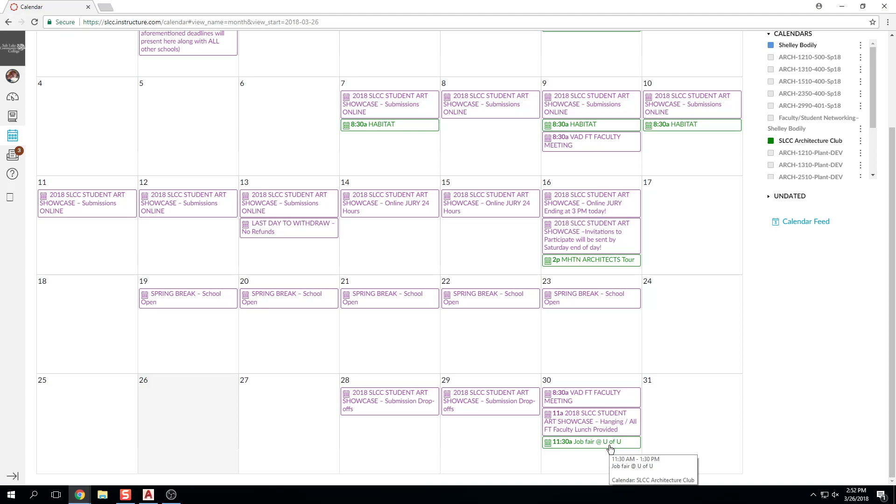You'll all know AutoCAD by the time you're done here. This is March. I talked to someone who works for Autodesk, does programming on the back end. That's cool. You could give him some suggestions on things to fix. I have several, though I don't know if he does AutoCAD specifically. He works for Autodesk, that's great, probably a really good job actually.

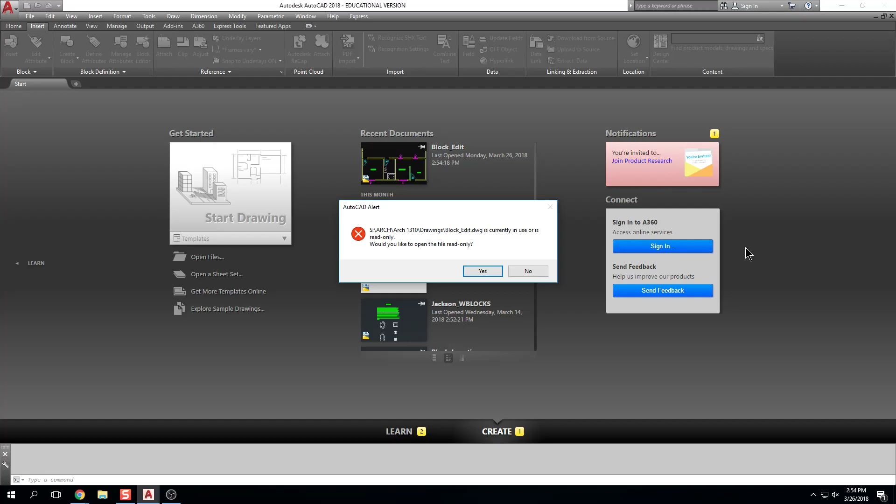Okay, so I guess dimensions are a little bit of a finicky thing too. I'm going to hurry and create a dimension type, I'm going to create a text style, and then we'll take this floor plan, create a paper space layout, scale it on the paper space layout, and in the meantime make sure our dimensions are showing by changing the annotation scale in model space. So all of those things will clarify.

And then finally, before we print, I'm going to show you how to load your pens again so that your line weights read right. Just to reiterate, line weights are color dependent in AutoCAD. So when I generate these layers and put specific items on those layers, they associate with that layer and turn the color of the layer. So A-wall is yellow, and yellow means something in AutoCAD when you use your pen file—it means a thick pen weight. So inherently, when you organize your items onto layers and print them with your pen file, you are assigning a line weight to your objects in AutoCAD.

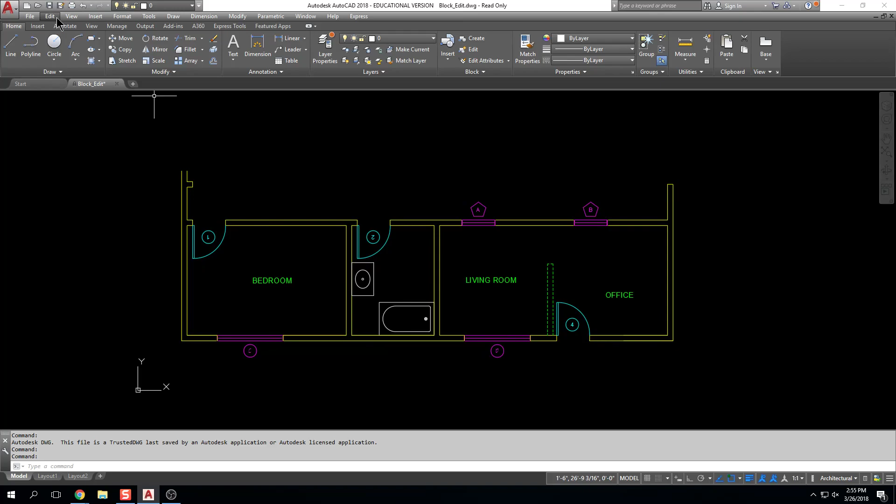All right, so first thing, I'm going to create a dimension style. I'm going to go to Annotate, come here to this flyout menu, and move through it pretty quickly, but I'll point out a few things. Any errors that I saw consistently, I'll point out.

Oh, that's not the one I wanted. This is the one I wanted. So I'm going to click on New. Oh, and it looks like I have one in there already, but I'm going to click New, and we'll call this Arch Annotative. Continue. Oh, see, I'm not quite on target. New.

Now, the most important thing here right now is I need to click on Annotative. So I'm going to click on New, give my dimension style a new name, and then click on Annotative. Annotative allows my dimensions to flux in size—regardless of what scale I print my drawings at, I only have to have one dimension style, and that dimension style will get larger or smaller depending on how I scale my drawing. So I'm going to hit Continue.

These settings actually look pretty good. So if I go to Lines, I'm going to change that to by layer, and change this to by layer as well, so that they associate with the layer. So those are some of the things I'll look for here.

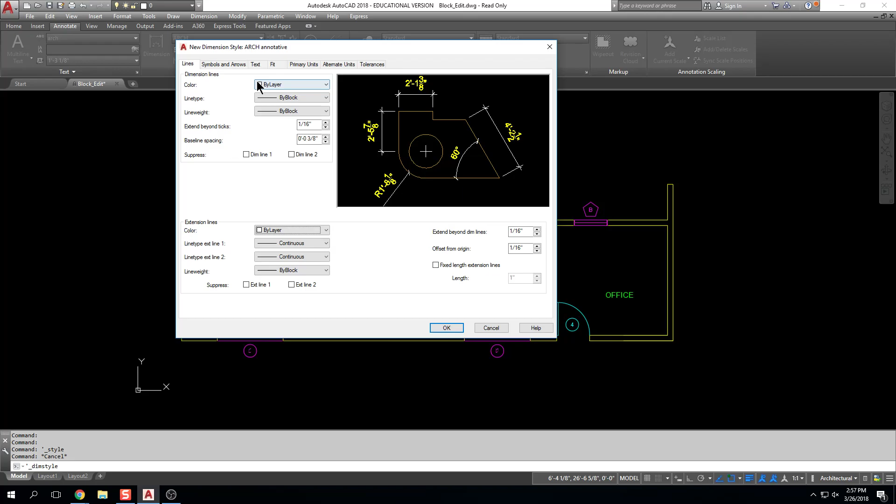I'll go to—yeah, are you good? I'm good. Well, except for, you know, the one thing, the code. But that's where I'm headed.

Okay, look, everyone's here, and you're attentive even after spring break. This is awesome. We were just talking about how rough it was today. Hey, did you tell him you dropped five things on the way in? Well, you missed—on my way back up the stairs I spilled half my cup of coffee on the stairway. Is that why it was halfway? Yeah, give her a break. Be nice, give her a cup of coffee. You know, I'm not quite awake today—half the day. Hey, that's where I'm headed. Okay, I appreciate it, thanks Kevin. I know half of it got on my pants, to be fair, not just the floor, but...

All right, so symbols and arrows—you know, I have an architectural tick designated here. This is really just kind of how we're defining these, but if you wanted them to look slightly different, we could change it to oblique. So instead of architectural tick, which is thicker, it could be oblique or whatever you want it to look like. All this other stuff looks good.

I'm going to go to Text. I'm going to choose a text style that I've already generated in my drawing. If I don't have a text style generated that's annotative, I'll create one. So here, I'm going to click on this little ellipsis, and I have Arch selected, but that's not annotative, and I want an annotative text style.

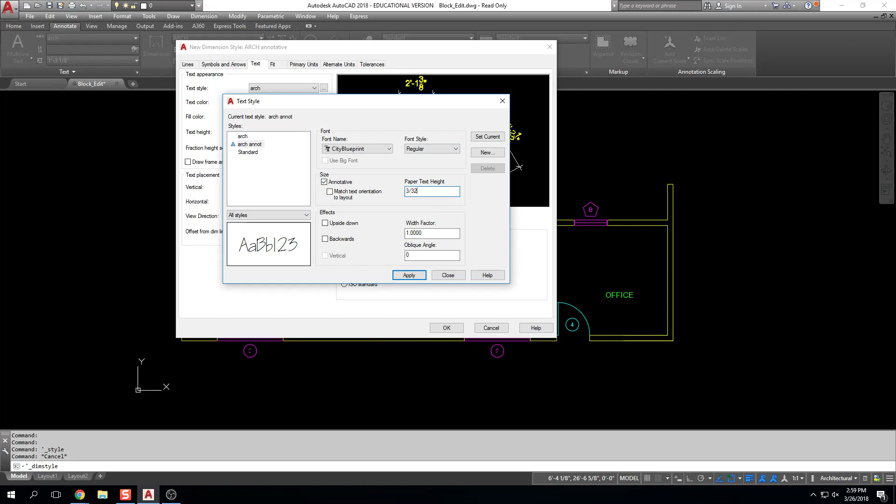3/32nds, okay, this is a departure from the book. Our book is somewhat getting outdated, it's on our list of things to do to update the course manual for this class, so this is a little bit different in the manual.

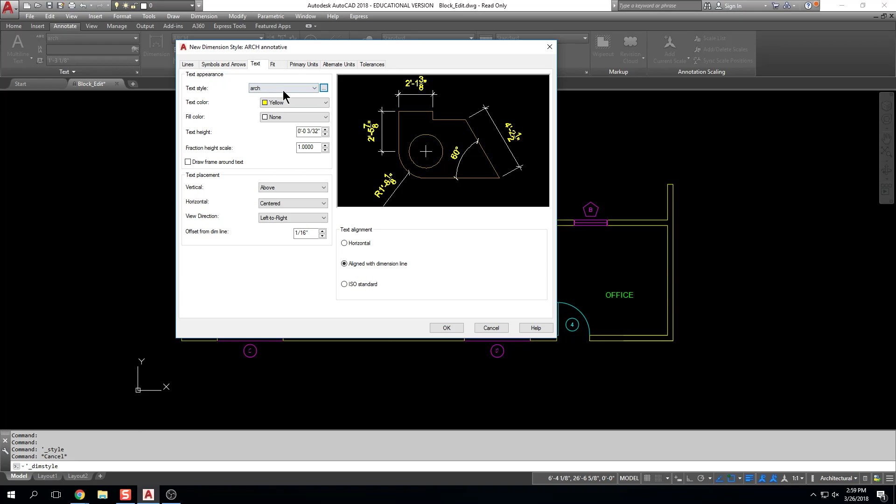We're going to check annotative, make the text height 3/32nds, and I'll hit apply, set current, and close out. Now I just need to make sure that my Arch Annotative text style is chosen.

Something really weird happens, right? The text goes all funny and looks tiny. I'm not going to worry about that just yet, okay?

So yours didn't do that? Yeah, mine didn't. Okay, it's probably still okay, it's just how my screen's maybe regenerating. But no, yeah, that's right. We'll see if it works, and if it doesn't, we'll go back and investigate.

By layer, vertically - I want my text to be above this dimension line, and I want it centered. The text alignment is going to be aligned with dimension line, as opposed to horizontal, where you see it breaks the line right there. I want it aligned with the dimension line.

I go to fit. These look good. I want this annotative, right? If I uncheck that, this number pops up - I don't want to work with that, so I'm going to keep this annotative.

I go to primary units. We want this architectural, precision 1/8. That looks good, this looks good. I'm not really worried about much else in here, it looks pretty good. So those are all of the settings I'm going to change.

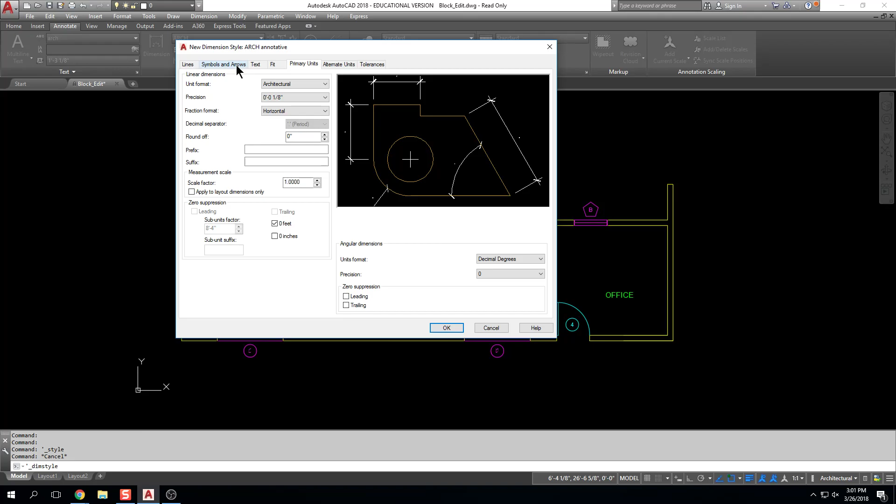With annotative dimension styles, which is similar to annotative text styles, the main thing I'm going to worry about is making sure that when I generate my dimension style I check that annotative checkbox, and that when I create my text, same thing - I make sure this annotative checkbox is checked.

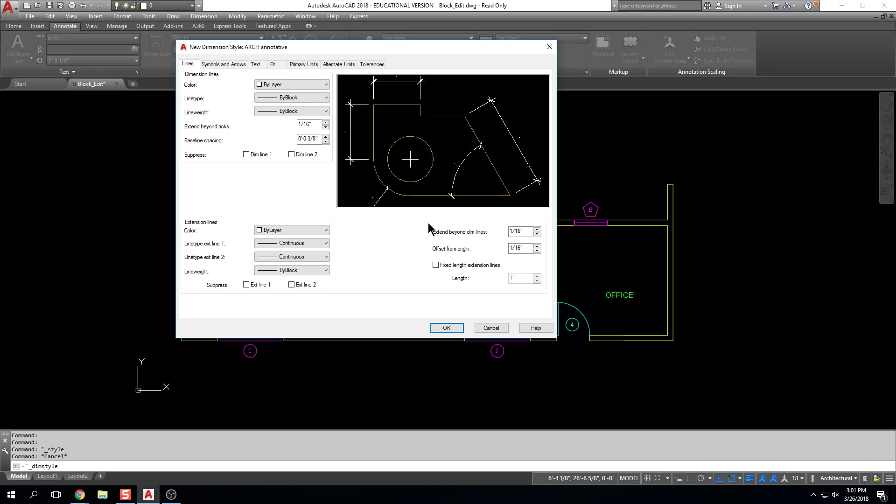Could you go to lines so I could just double check? Could I do what, sorry? Go to lines so I can just double check that. Oh, did I get everything right? Yep, oh okay, yep, there you go. So I hit OK, I hit close.

And I've just created an annotative architectural dimension style, right? So the first thing I'm going to pay attention to when I use my dimensions or text is make sure that the style I just created is current, because if this is set to Arch and then I go in and create my dimensions...

That looks pretty good, right? But then when I scale it, it may not look that great. That actually was kind of a good error because it actually worked out, but it wasn't supposed to. Make sure that when you create your dimensions, the style you just created is actually the current style - it should show up here, ready for use.

And the same thing with our text.

Did you fix your error? Well, it works on the new stuff. Okay, is it tiny still? Super. Okay so you think, time to dimension, linear dimension, click, click - oh, super tiny, not working, right?

The reason it's super tiny is because our model space is set 1:1, okay. Now we're going to just set that aside for a second, and I'm going to delete this dimension. I need to figure out what size I want to print this at.

What scale I want to print it at - then I'm going to set my model space to be the same as that scale, and then the dimension should be the right size. So I'm going to just put my dimensions on hold for now.

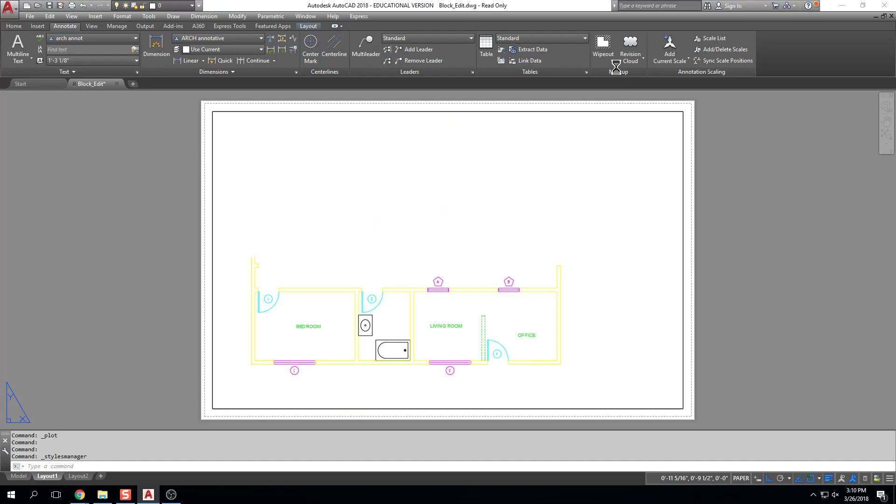So now Control P - that should be available there, okay? Yep. Where's Plot Style Manager? So Plot Style Manager is under File. Okay, so is it because these are missing?

Okay, so here's another thing, right? If these menus are not showing up, you have to go to this little drop down right here and choose Show Menu Bar. Okay, so then those will pop up and you can go to File, File, Plot Style Manager, and paste it in there.

So if you are here and it's available, you're like great, it's available, and you use it and you print and everything looks good, right? Then you go home and it's not there and you're like, well, it was there earlier today and this is the same file I was using, right? But it's not a characteristic of the file, it's a characteristic of your AutoCAD, right? So you have to take that file and load it in and then choose it as an option, okay?

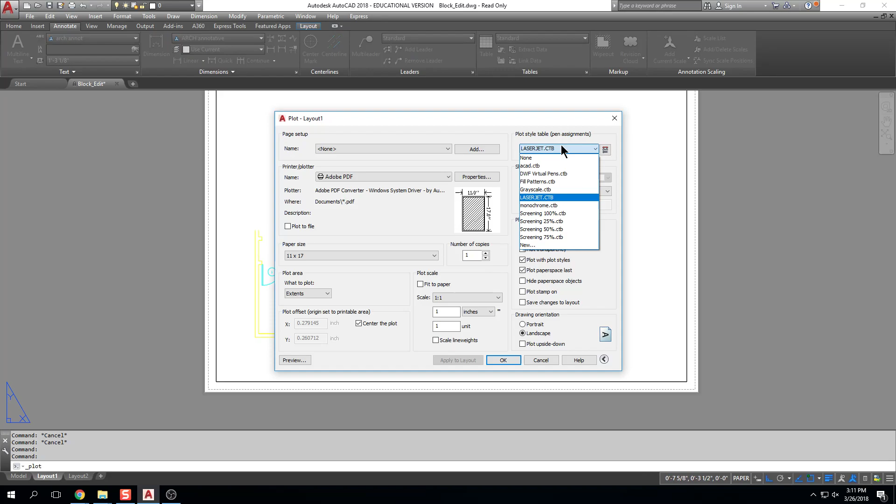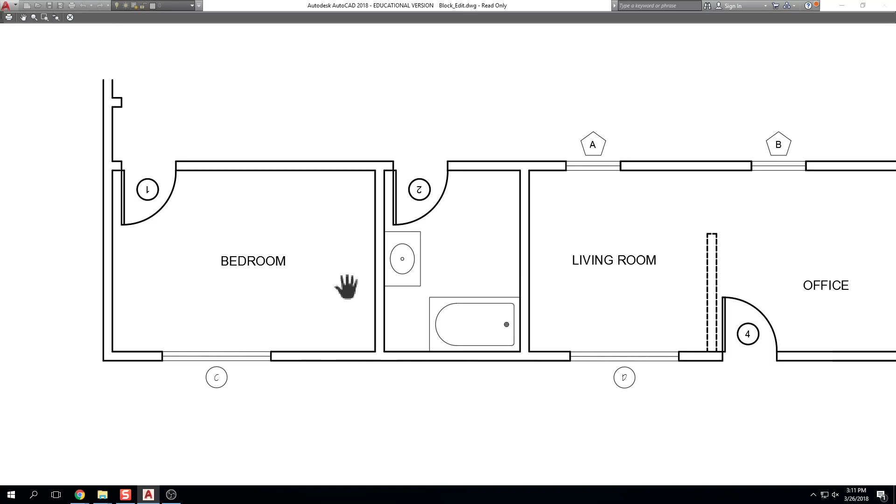So what does that do exactly? Control P - if I just have this ACAD CTB and I preview my drawing, it's gonna look like that. That's wrong, right? If I choose LaserJet CTB, preview, look how nice - I've got thick lines for my walls, thin lines for my windows, medium lines for my doors, right? That's right. If you think, well, I don't have either one of those, I'm gonna use like grayscale - and I preview that, that's wrong, right? I immediately can tell if you've used your pens or not, right?

Let's see - so all of these are going to give you incorrect line weights, except for LaserJet CTB, okay?

If you think, well, how am I going to get it home, how am I going to put it on my home computer, right? You just email it to yourself and load it in. So you can take this file from CAD Common, attach it to an email, go home, download it from your email, copy it, go up to File, Plot Style - we are having some troubles here today, aren't we? File, Plot Style Manager, and at home you'll paste it in here as well, okay?

Okay, all right, so I've loaded my plot style, my pen files, right? I've set up my page to be 11 by 17. I've set up my dimension style, my text style, but I haven't really used any of it. I've done a lot of setup right now, right?

Okay, so let's talk about - we're gonna scale this drawing, and by scaling it I know what scale to associate with my dimensions and text, and I can finish doing that stuff on my drawings, okay? So how do I scale my drawing, right? Well, I have this piece of paper, I have my viewport - you all hopefully know what a viewport is by now, okay?

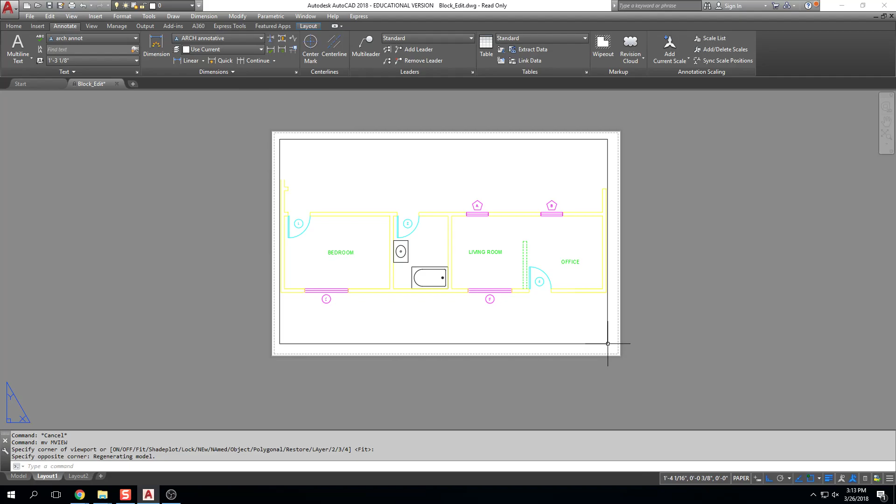If I select my viewport, okay, and I come down here, this says varies - oh, hold on. Hold on, mine has some things happening with it. That one. You are being recorded, Jameson.

Okay, so there's my viewport. There was something weird with my other viewport - it was locked, I think. But if I click on that viewport, do you notice that this number right here just shows like a decimal? That basically means AutoCAD took that drawing and made it whatever size it needed to be to fit on this page, right? So it's not to scale - I can't measure it and get a quantifiable dimension off of it, okay?

So to scale these drawings is really easy. I click on the viewport, drop down here, and choose what scale I want. Well, you may not know what scale you immediately need, right?

You're like, these are just scales. I don't have a sense for what they mean yet. So just try a few out.

1/4 of an inch. Well, that looks pretty good, right? But you could have accidentally chose 1/64. Nope, didn't work, right? But the nice thing about scaling this way is that you don't mess anything up by choosing different scales. So I can choose 1/64, grab it again, change it to 1/8. And, oh, nope, I can change it again, right, to 1/4. Okay, better, but maybe a 1/2 inch is even better than that, 1/2 inch.

Oh, too big, right? I think maybe the inclination is to look at this and say, well, if I scale it once and then I scale it again, it's going to scale a scaled object and then it's going to be all messed up, right? But that's not what happens with this system. I can continue to scale back and forth, right, to different scale sizes, and it will be correct every time. I'm not changing the geometry. I'm just changing how I'm viewing it, okay?

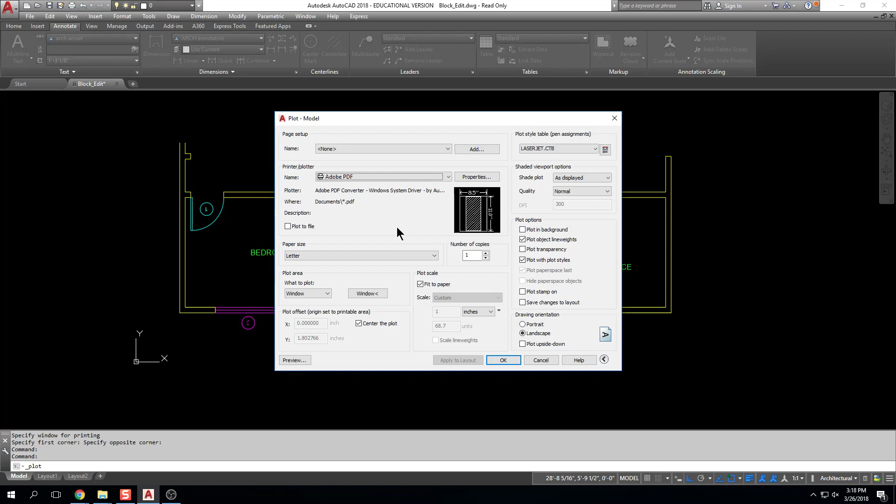Okay. This will be in the video, so if you have a question, you can watch it over again. Yep. Well, there's also an assignment, sorry. It says to print the drawing in paper space at 1:1 scale. Right. Yes. So 1:1 scale, model space.

Okay. Paper space here. I think where you're getting confused is the idea that when I click on this viewport, I'm scaling the viewport. Okay, so essentially I'm looking from paper space into model space and I'm zooming in and out to get an appropriate scale. Okay, so we're scaling through the viewport.

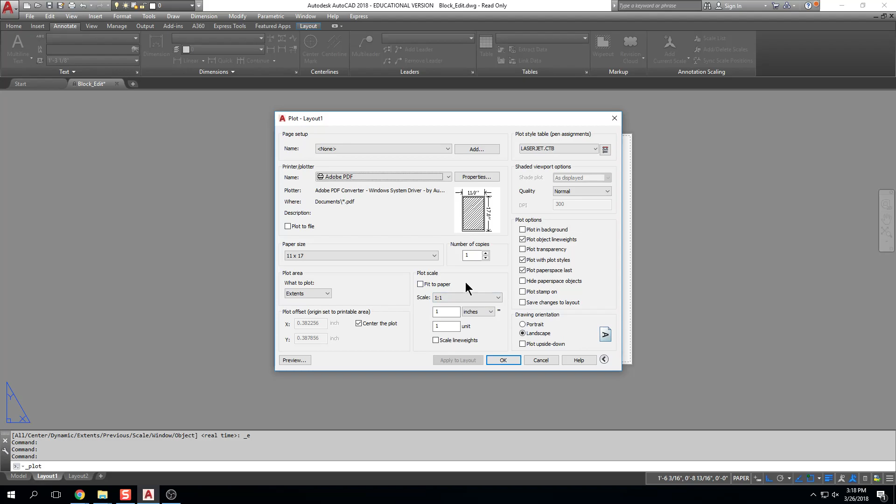But when I print in paper space, I'm still printing at a 1-to-1 scale, right? I'm not taking my piece of paper and changing that. This right here, if I take this and change it to like 8-to-1 and preview, do you see what happens?

So with that, you make the viewport that size and then, like, is that, then you don't have to worry about the scale and actual printing part?

So the idea is that Paperspace is like a physical piece of paper, right? And it's a physical piece of paper that can pop out of a printer. You're printing the piece of paper 1-to-1 because you can actually physically print it. The viewport scales the drawing so it fits on that piece of paper.

On this one, we have the viewport so that it's almost the same size as the page. But if you have a little tiny viewport, that's when you would probably scale that, do the actual printing scale. So in Paperspace, you're always printing 1-to-1, no matter what. That can change in model space, right? But in Paperspace, you always print 1-to-1.

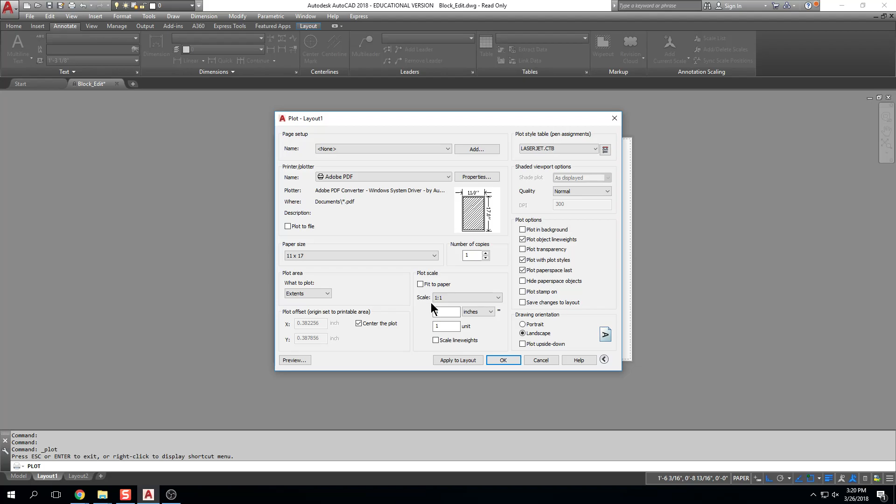I get it, it's confusing. I think I hear you. Eventually, you might wrap your head around it. But we'll just make a general rule: in Paperspace, this always stays 1-to-1. It's just a reminder that, hey, in Paperspace, we print 1-to-1. We scale the viewport, and then we print 1-to-1. And we can print 1-to-1 because the page is a physical size that will pop out of a printer.

When we're in model space and I say, hey, print that 1-to-1, it means that the stuff you're drawing, like those little puzzle boxes or whatever you want to call them, are small enough that when you print them, they could fit on a physical piece of paper that pops out of a printer. They're 4 inches by 4 inches, so you have like 4 of them on a page and you can print a letter size page. But if you have a building that's 100 feet by 100 feet in model space, then you can't print it 1-to-1. You have to print it scaled from model space.

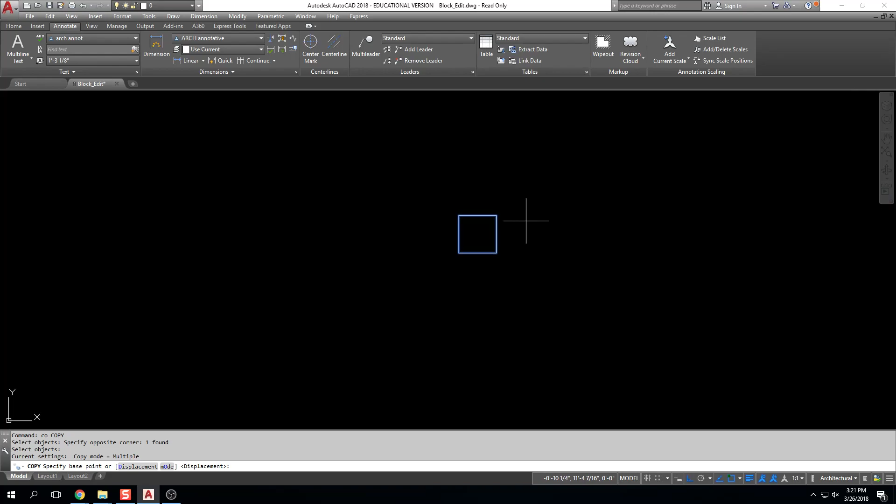Let me show you. Let me draw a little rectangle here. So if I draw a little rectangle and it's 4 inches by 4 inches, okay? And I'm going to copy this. Okay, you drew these little boxes, right? Well, let's just do 4 of them. It says you drew these little boxes, print these 1-to-1 out of model space.

So what that means is that if I draw a rectangle and it's, let's see, 8.5 by 11, that's a piece of letter size paper. And if I move it around, those objects, because they're so small, I really can print those 1-to-1 from model space. Control P, here's my window - is that actual piece of paper size, okay? I can choose 1-to-1.

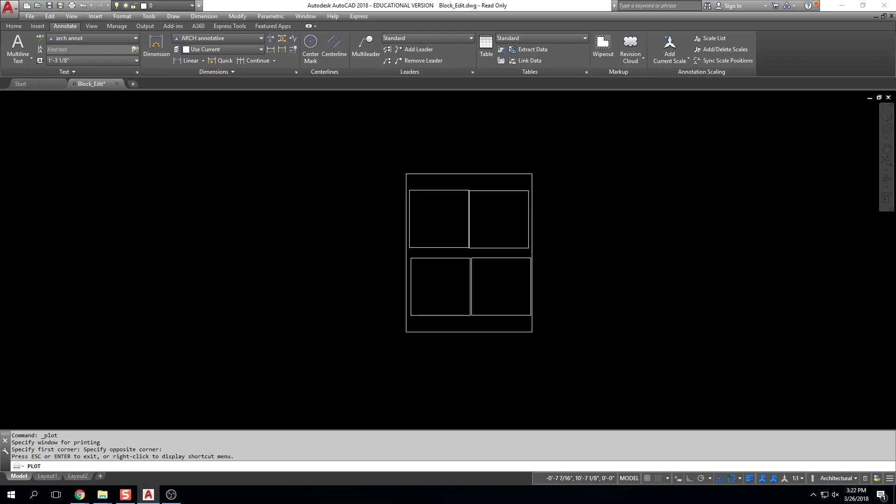We'll do portrait, and I'll preview that. Uh-oh, what did I draw? What layer did I draw those on? Okay, let's see, here we go. Uh-oh.

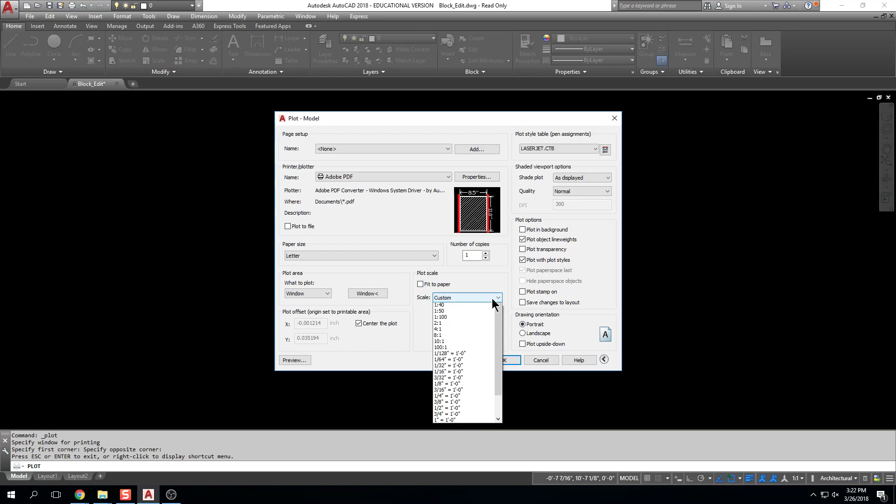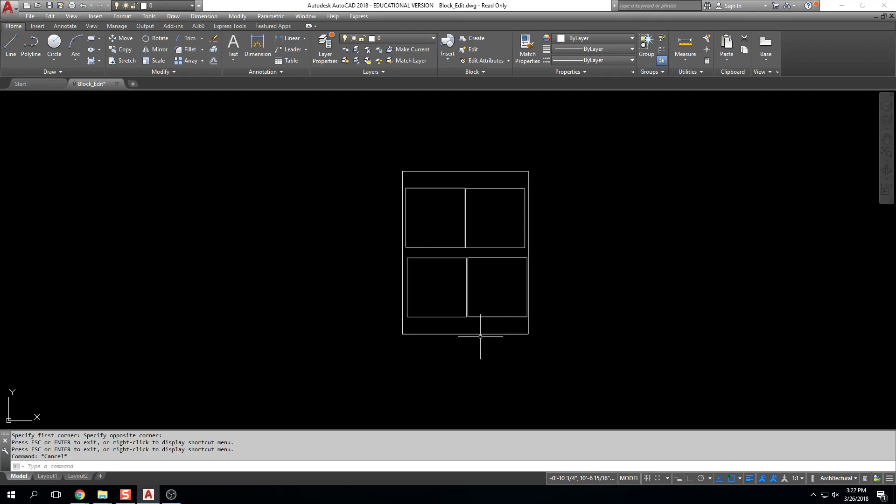I think we may have something going on. I think it's this file though. The idea - do you see what I'm saying? So this is 1-to-1. There's something with this file, things are not quite working the way they should. But with this, hold on one second. I've got this 8.5 by 11, that's a physical piece of paper size. But if I take this same page and I say, hey, I want you to print this floor plan on this piece of paper, it has to be scaled from model space. Does that somewhat make sense?

Landon? Yeah? Okay. But then from Paperspace, I have this physical piece of paper defined and a viewport, right? So this physical piece of paper is always printed from Paperspace 1-to-1, and then the objects are scaled through the viewport.

So would the best way to print in model space be to use the Window option from...? Well, I think in general, you'll probably just get used to the idea that you're not going to be printing a whole lot from model space, because it's just too difficult, and it doesn't allow you the freedom to do multiple viewports on one page. Sometimes I have you print from model space just for practice, to know the difference between the two. But in general, you very rarely professionally will ever print from model space - it'll always be through Paperspace. It's just easier, essentially. Does that somewhat help a little bit? Okay, yep.

There's something I noticed, especially from either Paperspace or model space.

When you finish your drawing at a 1:1 scale, on both paper and model space, and at the end of the day you realize, oh, I'm supposed to scale the viewport at like maybe a quarter of an inch or something, and you scale it and it fits, but then the text blows up. What happens?

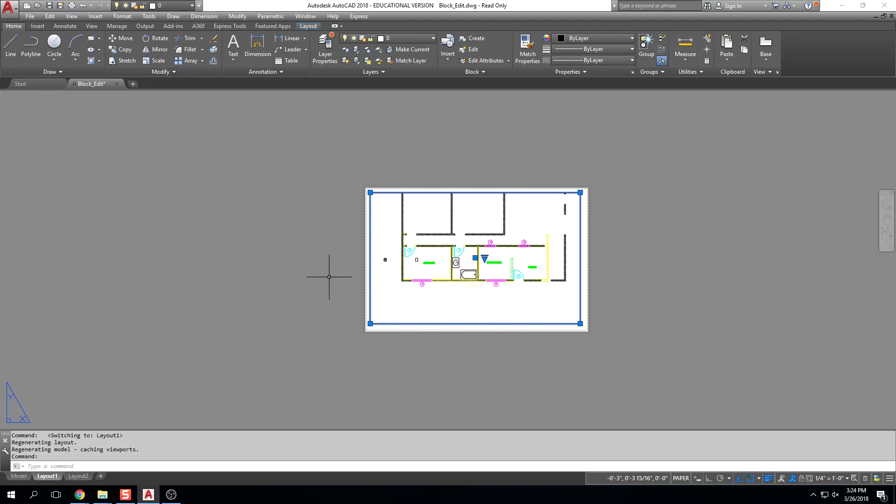So he's saying, well, I draw everything and then I add the dimensions and then I realize, hey, this needs to be scaled at a quarter of an inch equals a foot, right? And the size of the text on the dimension gets bigger. The idea behind that is that you've created your dimensions so they're flexible, so AutoCAD knows to make the text larger or smaller, so that when we print from paper space, the text is the right size.

Because the idea behind a scale factor is that it has a zoom factor associated with it. For a half inch, you're zooming in 24 times. For a half inch, it's less zoom. For a quarter of an inch, you're zooming in twice as much, it's 48 times. So if you have the same size text and you zoom in 24 times, the text is going to be treated differently than if you're zooming in double the amount. The quarter inch text will be twice the size of the half inch text because you have to zoom in more. Does that idea make sense?

So what happens when you change your scale is AutoCAD says, hey, you changed your scale, and now I have to zoom in double the amount of times to scale this object, so the text bumps up by double the size. That's what's happening when you change your scale factor.

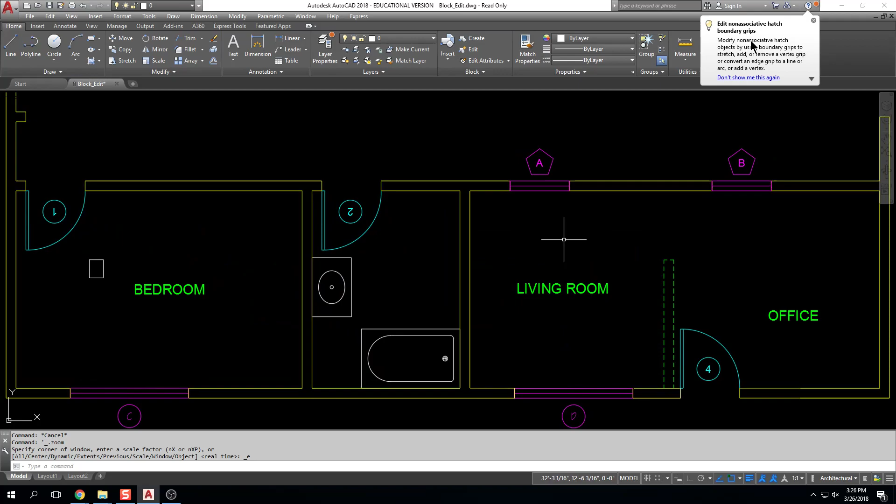So if I look at this view right here, let's look at that in practice. So when I've created my dimension style, I've created my text style, I've set up my page to print, and I know that when I print this drawing, it's going to be... let's see, was it a quarter inch? Yeah, there we go. Okay, so I know we're doing it at a quarter of an inch equals a foot.

Great, so that means that when I add my dimensions here, I have to tell AutoCAD, hey, you need to make them appropriate for a quarter of an inch scale. So let's pretend I forget to do that, right? I'm just working along and I forget that. So I go up to annotate and I click on dimensions and I draw some dimensions like this, and it doesn't look right.

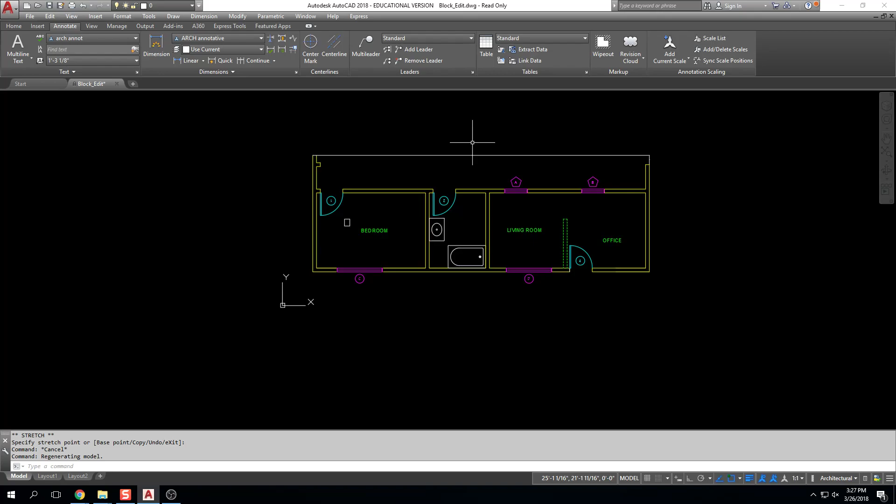This has happened to everybody, it happened to me too. I look at it and I think that is not right, but I created my annotative dimension style and everything is great that direction. The problem here is that it's tiny because it's scaling it for a 1-to-1 print. So essentially you're telling AutoCAD, I'm not really scaling this, I'm printing it as-is size, which means this little piece of text on here will print at 3/32 of an inch. That's how tall it is.

Now, if I'm going to a quarter inch, I can change this to a quarter. Hold on, we'll do our dimension style so it actually looks right. Let me change that back. Okay, there we go. Now when I change this to a quarter of an inch, it bumps it up, because it recognizes that now, in order for when I print this, it's gonna zoom it in 48 times to get it to print the right size. So it has to make it 48 times larger so that when it scales it back down, it's readable.

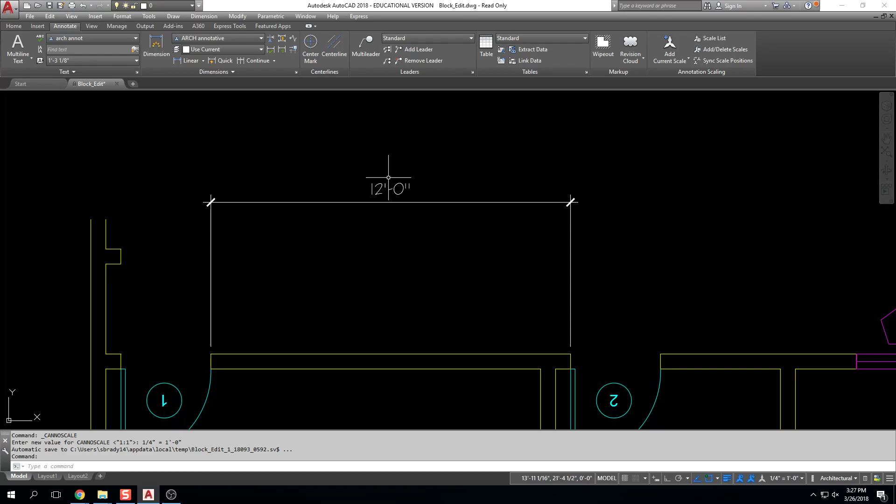So this text right here, let me just show you - this text is actually 4.5 inches tall. Okay, so that text right now with that dimension is 4.5 inches tall. If I come over here into my layout and I look at it in paper space and I measure it, when it's printed, it's 1/8 inch tall. And it's because it has to be zoomed in 48 times to scale, so it goes from 4.5 inches to 1/8 inch. Does that make sense? From model space to paper space, okay?

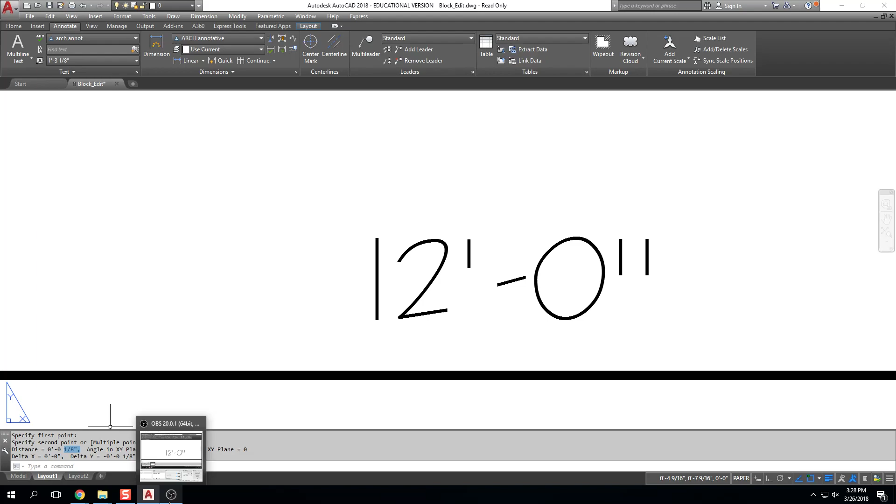So what you're saying is, hey, maybe it's a small space - maybe I've got all my dimensions and they look all perfect, and then I realize, oh shoot, I need to change my scale. And you change it from 1/4 of an inch to like a 1/16. And it jumps, and they're huge, and they overlap. The reason that's happening is not because it's wrong - it's because at 1/16 of an inch, the scale factor is 192. So you go from zooming in 48 times to 192 times, and this text has to be a lot larger to get it to be the same size in the viewport.

It's because of your scale. By default, when you come into a blank AutoCAD drawing, this down here is going to read 1:1. You see how it killed my numbers? That's the beauty of this system. I've created these so that they automatically scale up and down.

So when I say, oh wait, I want this to be a 1/2 inch—oh, there they are, right? Or I want it to be 1/4 of an inch—oh, they're the right size, right?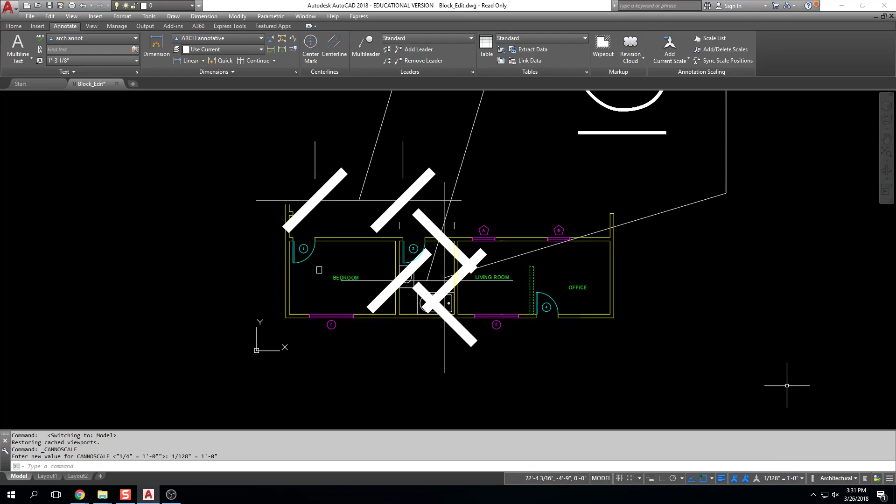But you will see by changing this that those dimension styles do change. The size changes because they're being zoomed in and out at different scale factors when you change the scale. But the nice thing is that even though this goes to, let's say, 1/16 of an inch, and they're gigantic...

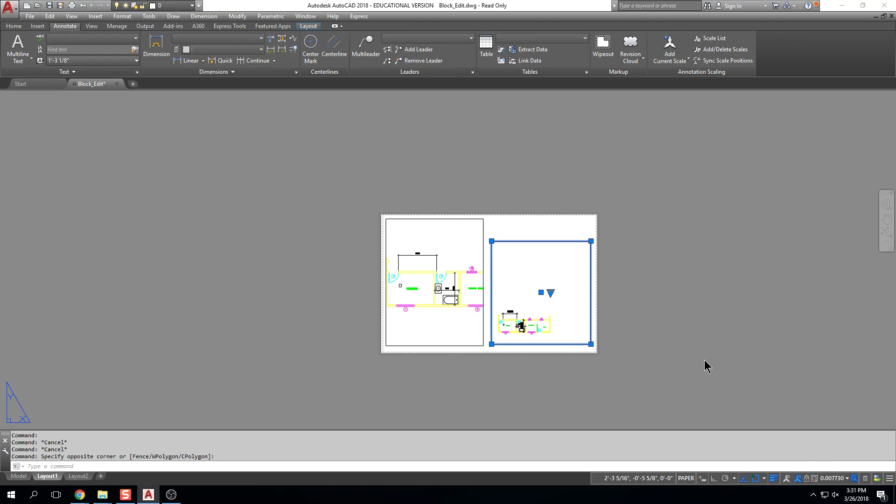If I go back to my layout here, let me do another viewport. This viewport right now is scaled at 1/4 of an inch. If I grab this viewport and change it to a 1/16... do you see that those two pieces of text are exactly the same size?

Okay, let me show you. Right, do you see that? So the idea is that the text might look different sizes in model space, but where it really matters—when you actually physically print them—they come out the same size, regardless of the scale they're presented at.

That makes sense? Yep. So is it best practice, say, if you're doing the overall view and then also zooming in on the bathroom—is it best practice to copy the bathroom outside if you're doing a separate set of dimensions?

Right. So the way we have these set up is so that all the dimensions are going to read in the viewports. But you can set them up differently—that's a good question. Because you've got dimensions on the bathroom, and we only want to see the bathroom, but it's going to be at a different scale than the overall floor plan.

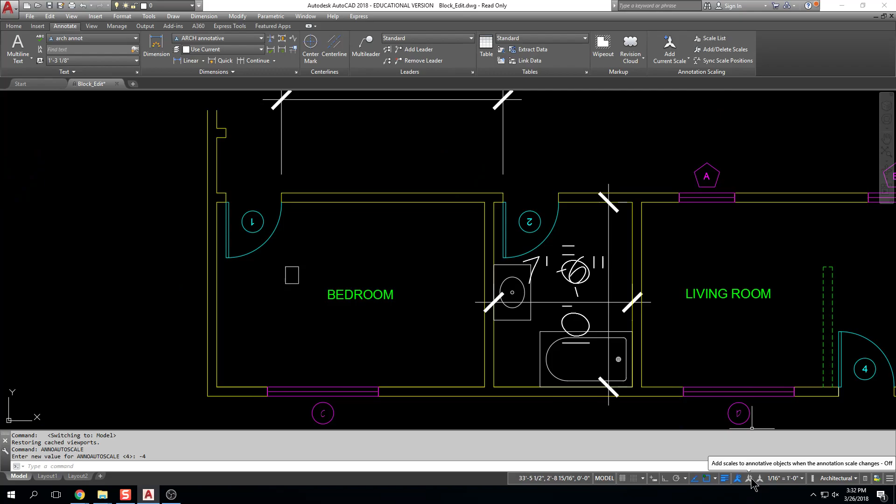So what you're going to do is not add this little lightning bolt right here on this scale—we're going to uncheck that essentially. Because what happens when this lightning bolt is clicked on is that it's meant to make your life easier: whenever you change the annotation scale, that annotation scale is added to every annotative object.

And what that does is make it so that within your viewport you see everything. But if you don't have that checked, then when you create a dimension style, it will take on the scale of the view that is currently available, and it will filter out anything else through the viewport. Does that make sense?

Yeah. Okay, is there a way to add those back in afterwards? Yeah, so what will happen is you could have just these dimensions on the big plan, and then when you zoom in, just those other dimensions at the different scale on the enlarged plan. They won't show on each other's viewports.

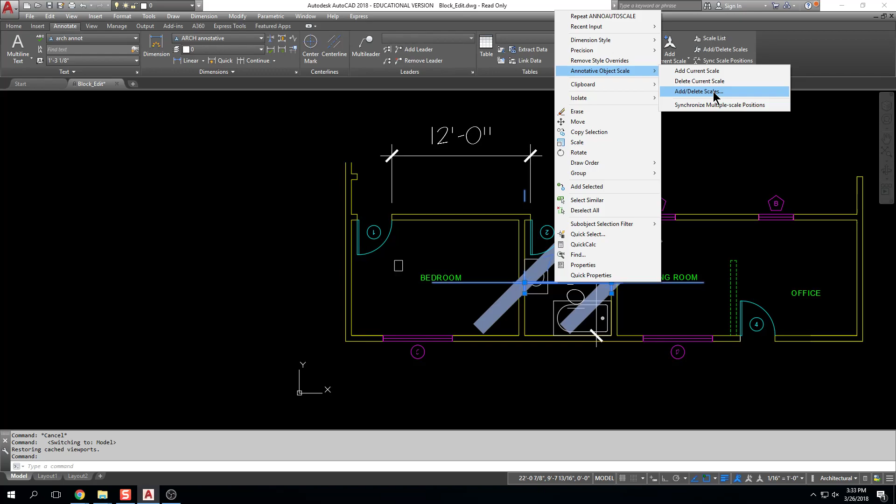So then you're like, well, but later on maybe I want to add those. So what you can do is click on it, right click, and choose to add a scale—add the current scale, or choose 'add or delete scales' and click add. You can add whatever scale to that, and then it will show up in your viewport.

But so, like I was saying, you can just do that internally—you don't necessarily have to copy it outside. No, it's just the lightning bolt that would affect it. Yep, exactly, yep.

Makes it a lot easier because then you don't have copies of things all over the place. My font was saved onto a different style - the standard. Oh, it's not in this file. No, I made it in that file, the other file. So if you created a text style in your template file, and then we opened this file, which had nothing to do with that file, you won't get those settings in this file.

It'll take you a little while to wrap your head around this, right? It's not an easy idea. Especially in AutoCAD, for whatever reason, it's a lot easier to understand in Revit just because it's always been that way and it works. But in AutoCAD, especially if you've used it prior to the last little while, this is kind of a new idea.

All right, let's see. What other questions do you guys have? Any other questions?

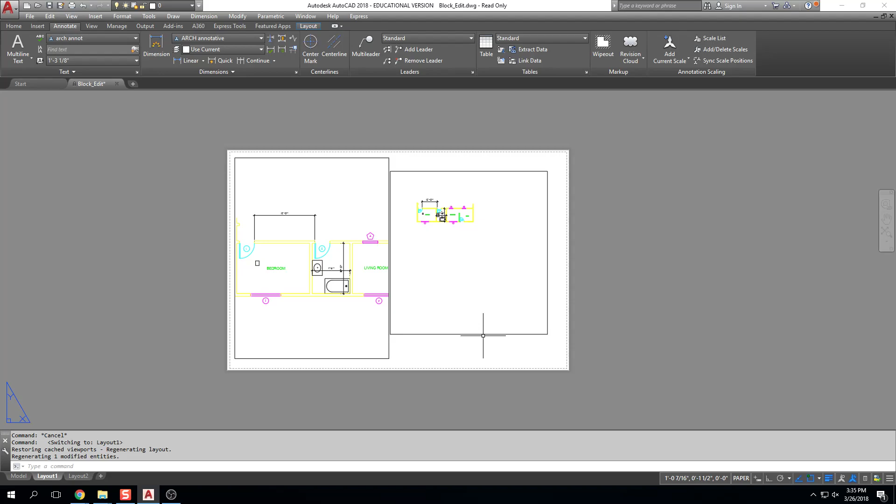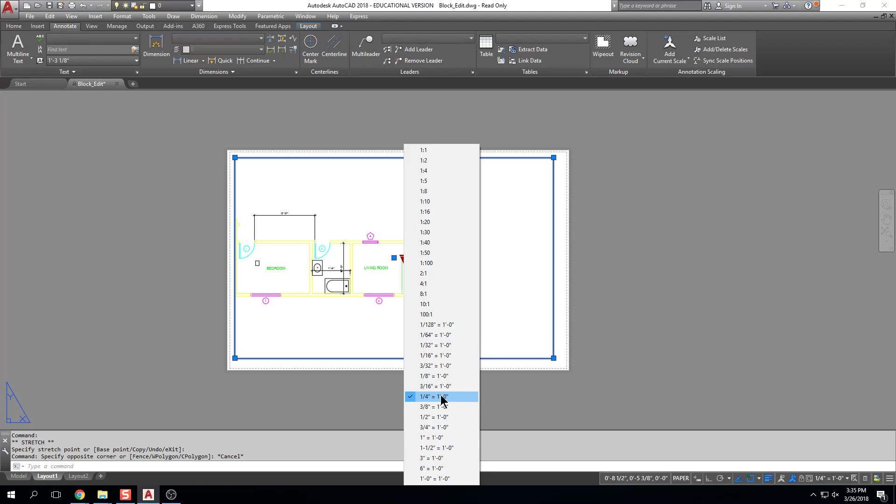So I wanted to talk about scaling, which we did, right? The idea of scaling in Paperspace. We're going to grab our viewport and scale down here. One thing AutoCAD added here, and at first I thought it was a great idea but I don't like it as much anymore, is this little grip right here. If you click on it, I feel like it's a little deceiving. It shows you all your scales and says, hey, this is at 1/4 inch. Well, great. What I don't like is that if I chose like a 1/2 inch, it does that, right? So what this does is instead of taking the viewport and scaling it to a 1/2 inch, it scales it and then expands the viewport to show you how big your piece of paper would need to be to accommodate that scale.

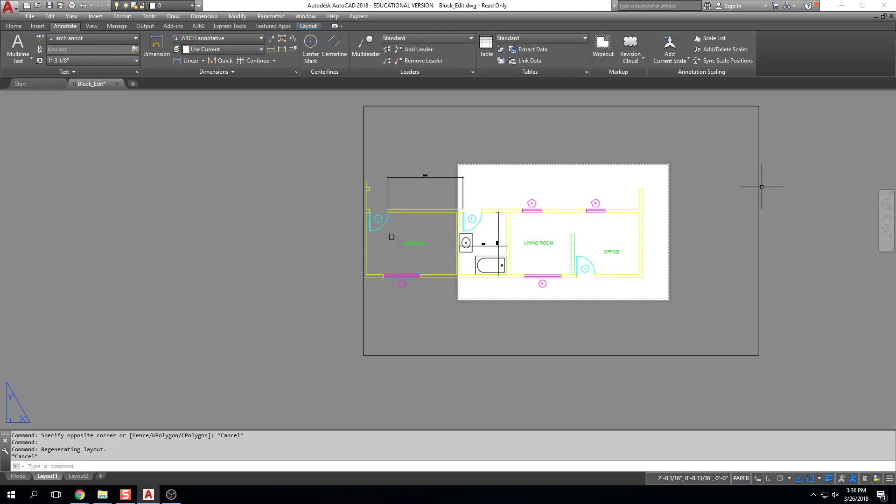So immediately, if I were a new AutoCAD user, I'd be like, I've done something wrong. Something's wrong, my paper is not working, my viewport is not working, right? When in actuality, I think AutoCAD's trying to help you, because they're letting you know if you want this floor plan at that scale, you have to make your piece of paper larger. So I think they're trying to help you, but when you're first learning, it's kind of confusing, so I might just stray away from that and just click on your viewport and choose your scale down here.

Okay, so scaling, setting up your pages, setting up dimension style, changing your annotation scale down here - those are all things you'll want to remember. I think the main thing is that if you create an annotative dimension style and apply it and the text is so tiny you can't read it, just know you're going to need to come down here and change the annotation scale of your model space.

We talked about pens. Any other things you need clarification on? Not yet, maybe, right? Okay, all right. What about blocks? Does the idea of a block make sense to everybody? Pretty good. Okay, well, let's do this.

I'm going to introduce the idea of attributes. Let's introduce the idea of attributes.

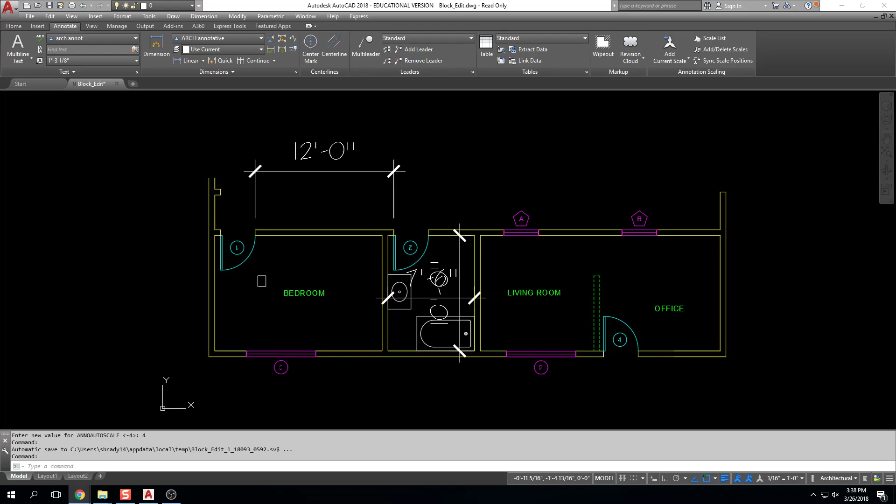All right, let's talk about the idea of an attribute. We'll start talking about it today, and when we come back on Wednesday we'll talk about it a little bit more. Then next week we'll talk about XREFs and how to draw elevations and different things, and that's really the end of our lecture, and then you'll be working on your final.

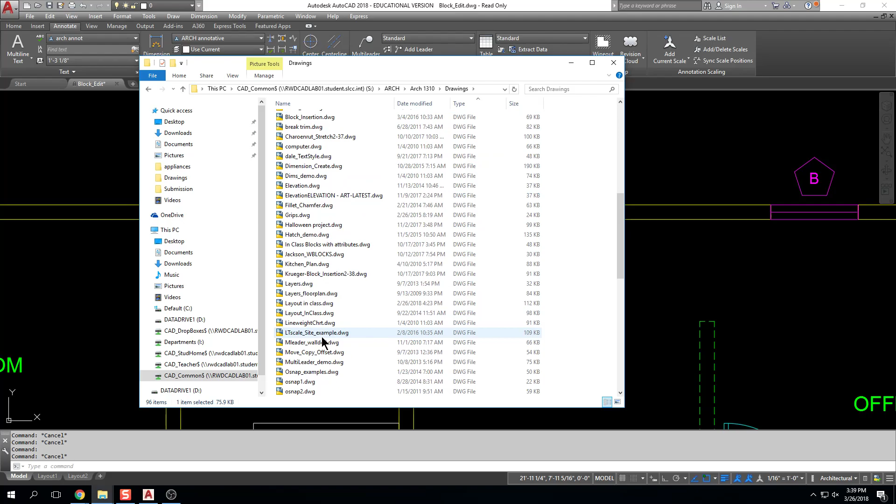Okay, I'm going to delete these. So hopefully, if you don't yet, it'll take you some time to get there maybe, but you understand the idea of a block. Okay, and I'm going to go to CAD Common. We're going to go to Arch 1310 Drawings. Okay, which one do I want here?

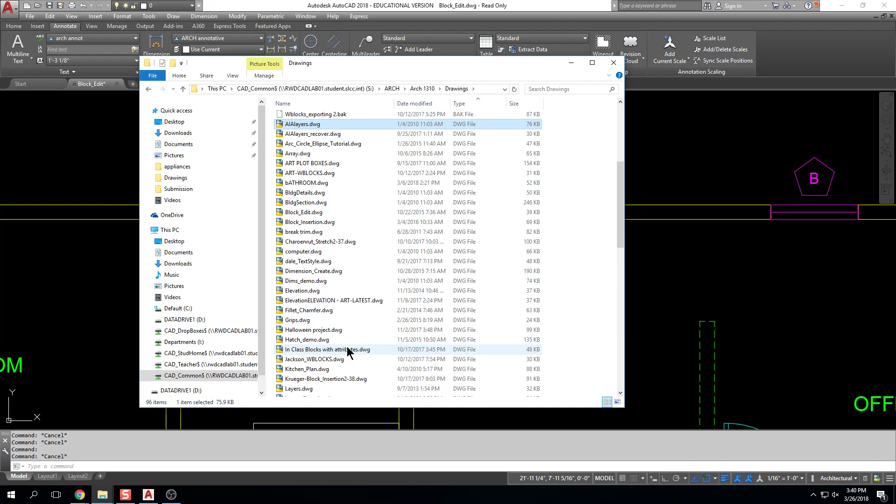Well, we may just be sticking with this one that we have. Okay, I guess we'll just stick with this one.

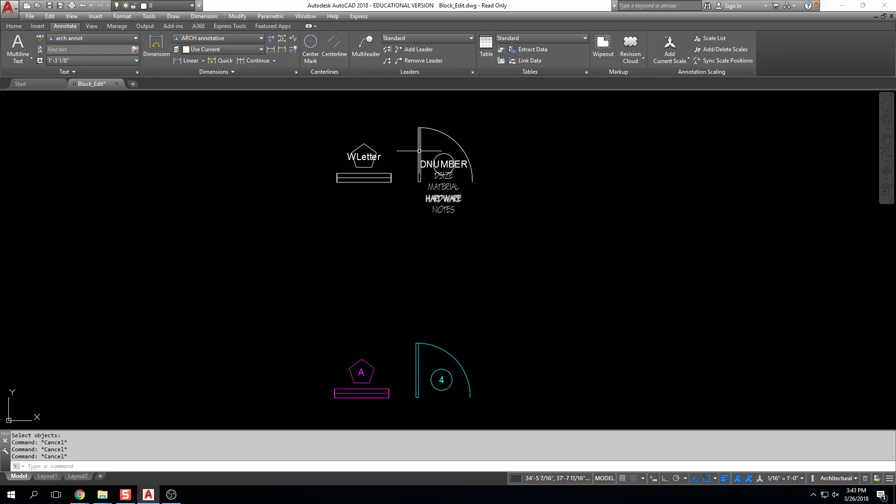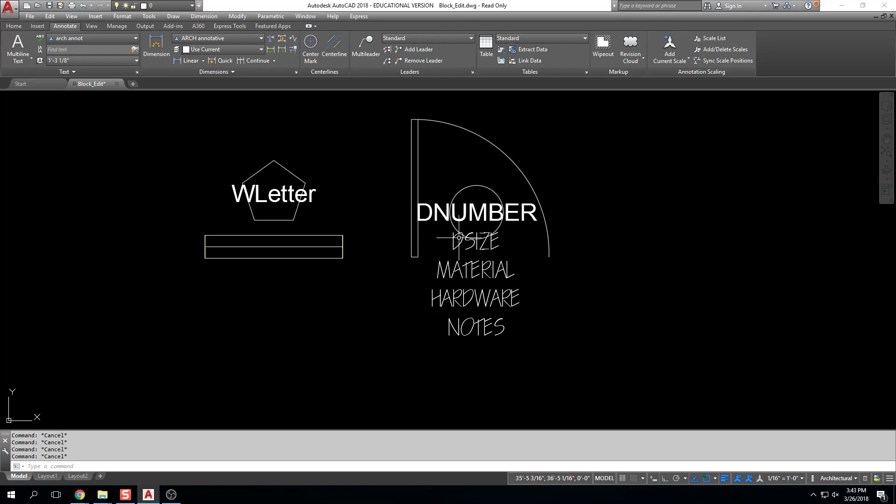So we all know how to generate blocks, right? We draw our geometry, so we draw the window geometry. You also are going to start adding this tag geometry to your blocks. So I'm going to draw my door panel, I'm going to draw my door swing, and in addition to that, I'm going to draw a circle that is then going to house my attribute. So if we look at this door and this window, I have my little placeholder for my tag, and then I'm going to define my attribute that then shows right there.

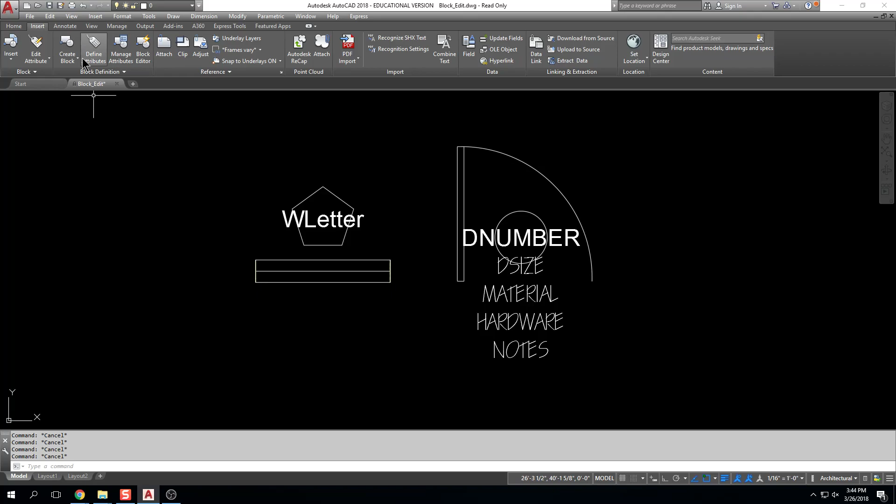Let me show you how we are going to add attributes. I'm going to come up here to Insert. I've got my block definition here, and I have my Define Attributes icon here. If I click on that, I have my attribute definition dialog box pop up. So there's a lot of settings in here - there's a lot of different visibility settings, and then we have the naming of the attribute, and then we have the actual text size of the attribute.

And again, I just want to clarify that attributes are going to be characteristics of the door. So the door number, the door size, the material of the panel, the material of the frame, the hardware, any comments or notes, the swing - anything that defines that door, that is going to be an attribute. And you can really add as many or as few attributes as you need for your project.

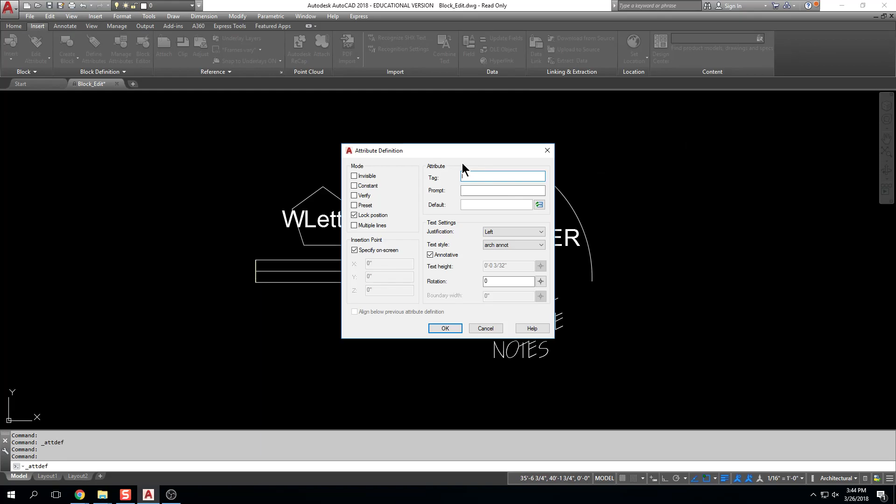Oh, let me get back into there. There we go. Okay, so let's talk about attributes. First, we have our visibility. So we can make attributes so that they are attached to our block, but not visible.

So, for example, our door here, really the only attribute that's visible right now is its number, 4. Even though you may know, now you know, the door size, the door material, the door hardware, and the notes are also attributes associated with this door. But really what we're seeing is only the actual number.

So we can make attributes invisible. We can make them constant, meaning not changing. So door numbers are generally going to be something that changes with every door - doors are not all the same number, 1, 2, 3, 4, 5. So we have the ability to make an attribute a constant value or a fluctuating value.

I'm not going to worry about verify, preset, or multiple lines, but I am going to worry about lock position. So the three we're going to worry about as far as visibility are invisible, constant, and lock position. Lock position will make it so that the visible attributes shown on the door, once this is all finished, you can't move them, right? Which is good and bad.

We'll talk about that. Okay, we have our attribute definition. We have a tag, a prompt, and a default. The tag is going to be descriptive, so something maybe like door, hold on a second, I can't remember. Yeah, there we go. DNumber.

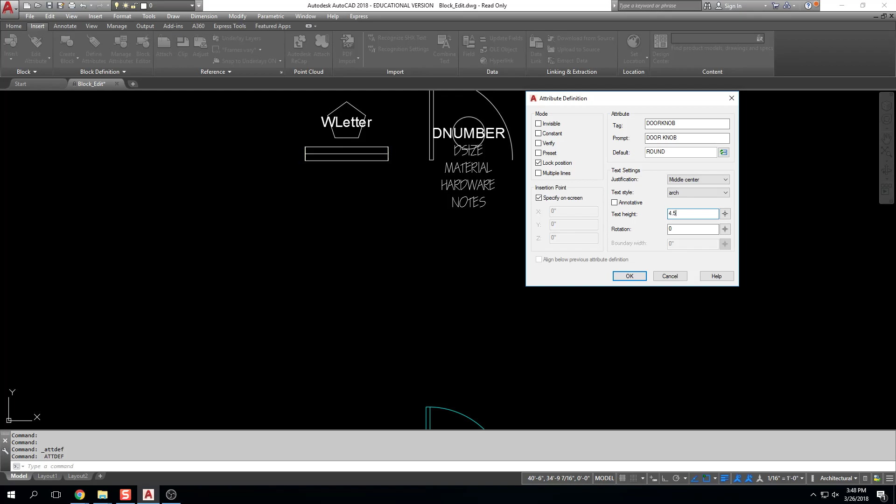Okay, so right now I'm defining my attribute. I've made it a locked position. I'm tagging it as a doorknob. The prompt is doorknob, the default is round. I've defined what I want my text to look like in my tag area, which is I want it middle center. I want my text style architectural. I'm going to uncheck annotative. 4.5 inches. Okay, I hit enter on accident.

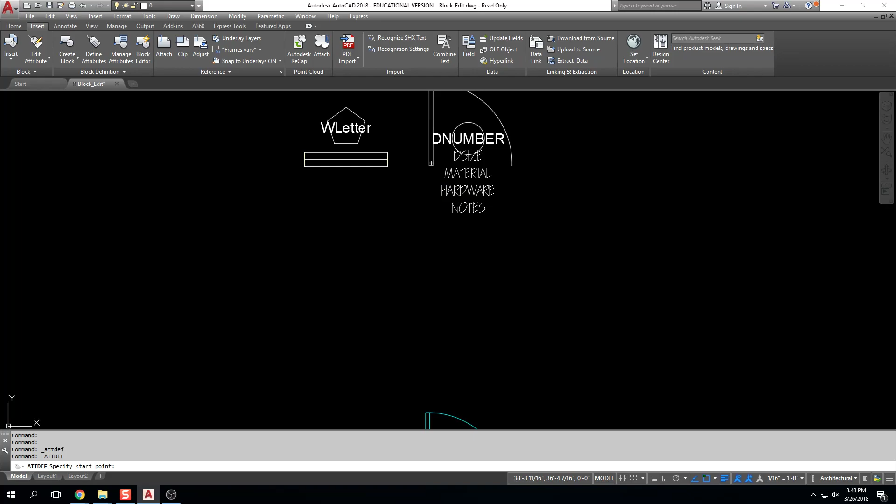Essentially what I did is I defined everything. I hit enter—if I would have hit OK, it would have done the same thing. But what AutoCAD is prompting me to do now is to place my attribute. I wasn't prepared for this. Hold on, I'm gonna have to go. Sorry, guys.

I'm gonna have to go back in. I didn't want to hit enter. Okay, let me do that again. Define attribute, okay.

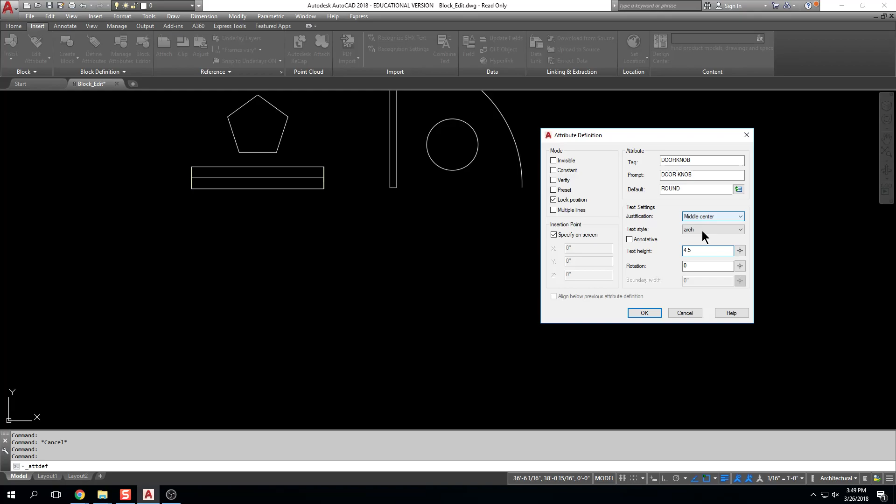DNumber. Middle center. Arch. 4.5 inches. Okay, so I've just defined my attribute. By doing all of this text and assigning a justification, a text style, and a height, I've just defined my attribute. I'm going to hit OK.

I'm going to be bumped out into model space, and then I'm going to define where I want that attribute to live, which is going to be the center of this circle that houses the tag. Click, and it places my attribute right there. Okay, so what does that mean? How do I actually get that to function?

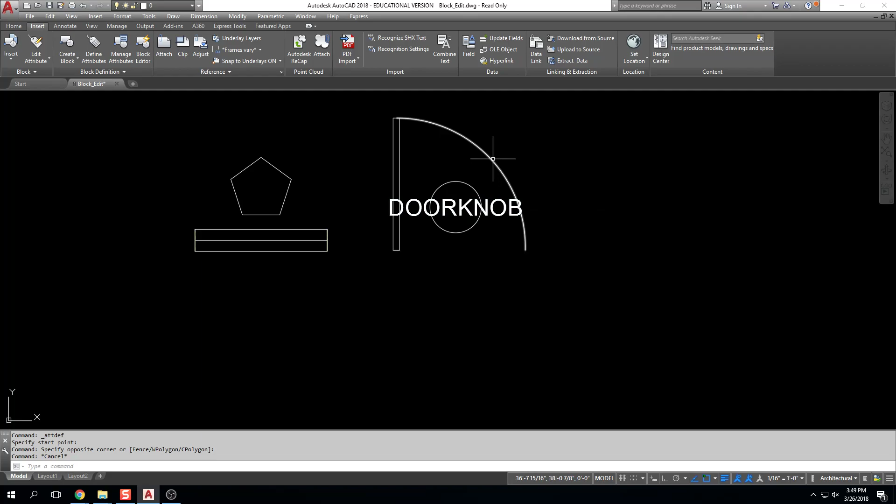The way I'm going to get this to function is I'm going to define the block. Don't worry, we'll go over this again—I'll define these and then we'll go over it again on Wednesday. I think it'll make more sense.

So I've drawn my block—I've drawn a tag, a housing for the tag. I've defined my attribute, right? But my attribute doesn't take effect until I actually define this as a block. So the process of creating attributes is kind of a two-step process: I define the attribute and then I create the block, and that will activate the attribute.

Okay, so I'm going to click on create block. I'm just going to create a regular old block for purposes of being in class, to make this a little bit more quick. Pick point, click, select objects, enter, hit OK. When I hit OK, the attribute is activated. It says, okay, great, you're creating a block and now the attribute is activated.

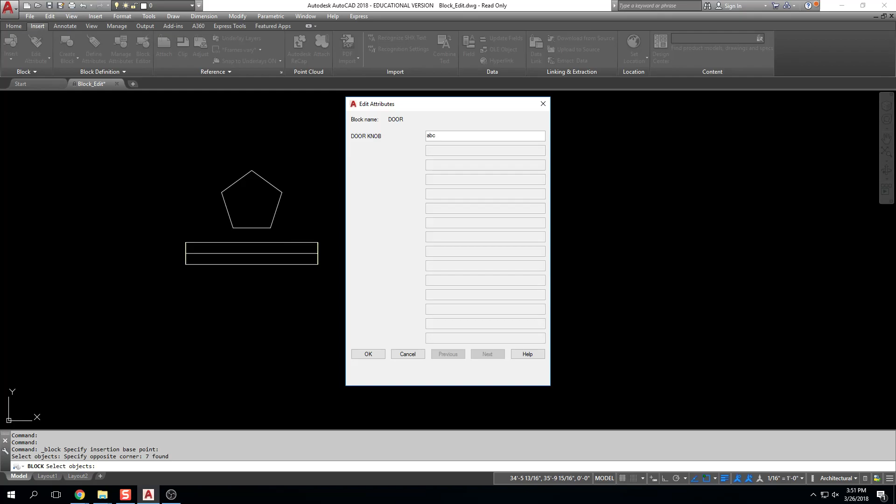Would you like to input the information associated with that attribute? So you're going to see that doorknob, that was my prompt, right? DNumber. Well, the default value for that is round. Maybe I do something like, I don't know, we'll make it ABC doorknob. I hit OK, and there's my attribute, ABC. Okay, let me copy this. I'm going to explode this block that I just created.

This right here is my tag. Remember I typed in doorknob, one word, no spaces. That is my tag. This is the prompt that pops up when you activate the attribute and type in the information, okay?

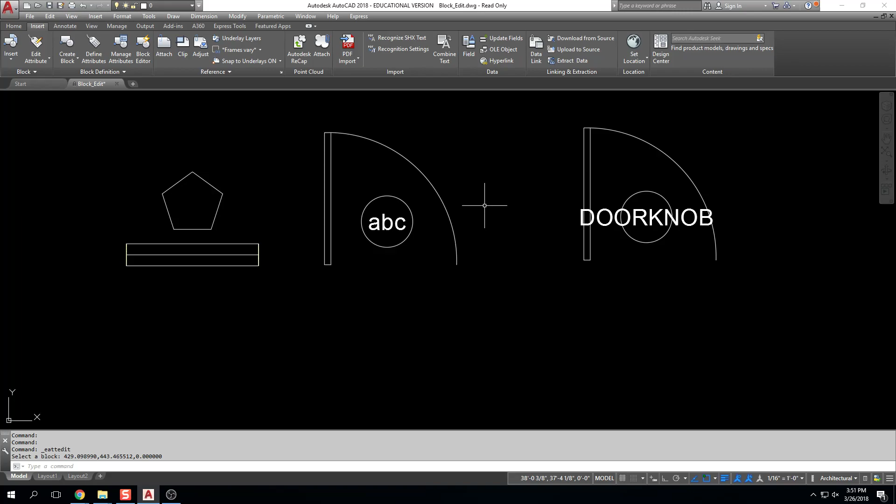Let me do this all one more time. I'm going to delete that, and I'm going to actually explode this block and delete that tag. I'm going to start from the very beginning, okay? I'm going to delete this little circle too.

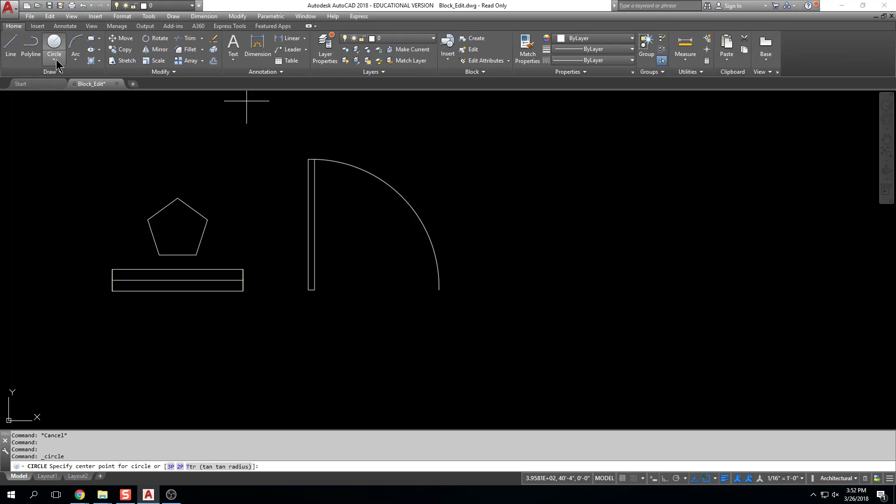To create a block with an attribute, I draw my block just like normal. I go to home, create a circle, and draw my little housing for my attribute. Then I go to annotate, insert, define attribute. Now you know what the tag is. The tag is that placeholder in the block. The prompt is what pops up when I activate the attribute by blocking the object.

I want this to be locked, so the tag here, let's call this door number. All the text, I want this to be middle center. If I had chosen left, my attribute would be left justified in the circle, which doesn't make a whole lot of sense. We want it right in the center of that circle.

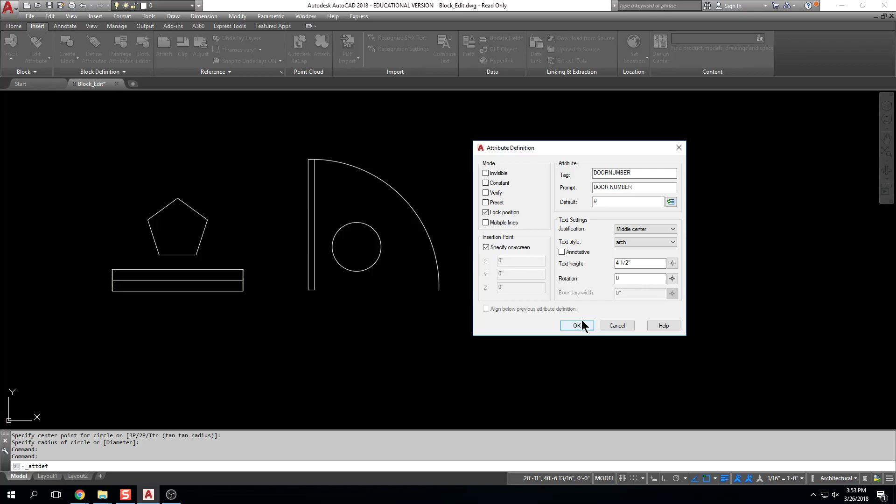That's why I chose middle center. My text style, my text height—I chose 4.5 inches because it's a good size to fit in that block right there. I hit OK, get bumped out of the attribute definition, then click in the center of the circle to place my attribute, and it middle center justifies it in that circle.

Okay, I've added one attribute. I can add another if I'd like, so I can come back up here to define attributes. I'm going to create another one.

Now the second one, really I don't want to see it. I want that information contained in the block, but I don't want to see it. So the second one I'm going to make invisible—check. I'm going to make this maybe door panel. And the default, maybe we'll just put a little dash.

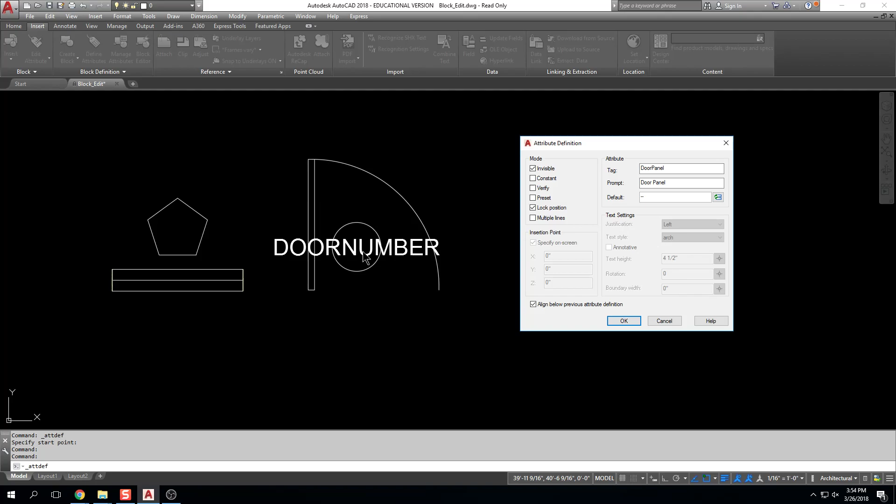Now, because I've already created one attribute, the second one that I create, AutoCAD knows that I want to create it in the same manner aesthetically as the first one. So I can choose align below previous attribute definition, click, and I don't have to define these text settings—they automatically mirror this one. I hit OK and it bumps it in right below there.

Okay, let me do one more. This one's going to be the door hardware. The default, we'll just do a dash, and I do want that invisible. If I create it without this checked, I have to delete it and redo it. I'm going to click on align below previous and hit OK—door hardware. So by doing just what I've done here, I've defined these attributes. When I block that door, they activate.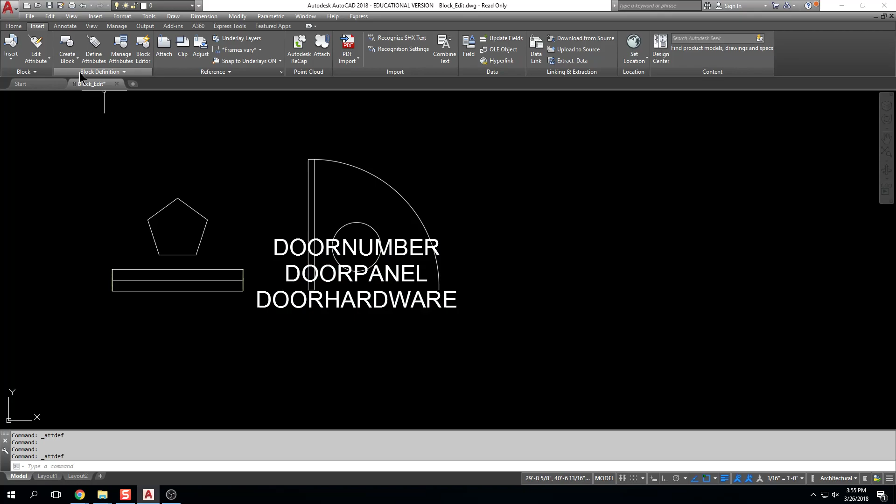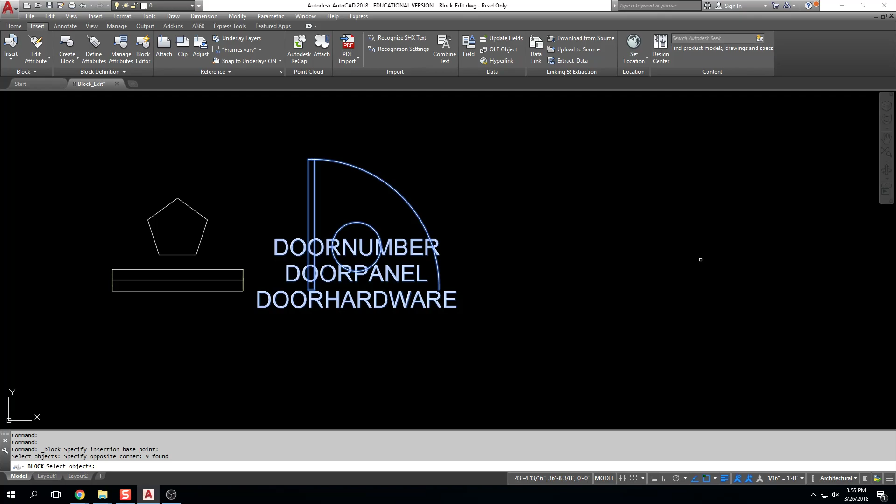So now that I've created them, I'm going to come up here to create block. We'll call this A-DOOR-ATT. I'm going to do my pick point, click my convert or select objects, select all of my objects, hit enter, and hit OK.

And now, as I block that block, my attributes are activated, and it asks what is the door number for this block. Well, we'll make it door number 10. What is the door panel? Let's type in cherry. What is the door hardware? We'll make it a privacy. And hit OK. So now all of that information is built into that door.

If I click on my attribute twice very quickly, this is called BATTMAN—block attribute manager, BATTMAN, it's a shortcut, B-A-T-T-M-A-N. I can come in here and click on this and alter it.

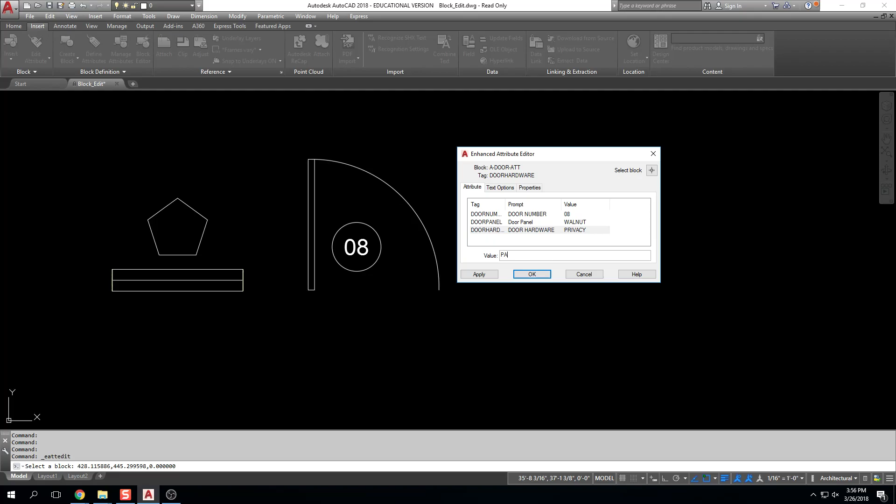Instead of 10, let's make it 8. Instead of cherry, let's make it walnut. Instead of privacy, let's make it a passage, and hit OK. Now that information, you see number 8, it's changed. The really nice, good and bad thing about attributes is that they're highly transferable.

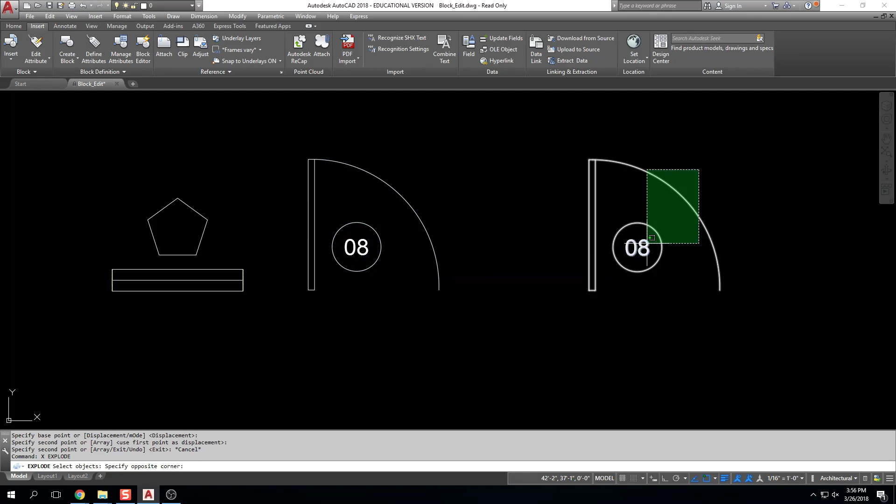If I wanted to create another door, like stretch this one to make it larger, I could do that and just leave these attributes, reblock it, and use them again. So I don't have to continue to redefine them. These don't somehow connect themselves to this specific door. The second I reblock, they become their own independent attributes for that specific door with that specific name. So I can create one set and copy them to other items, and they'll work just fine. Attributes are highly editable in that aspect.

But they can be a little finicky. In the actual attribute definition, if you don't get it done right the first time and it's not functioning correctly, my best advice is to delete it and redo it. You'll have an assignment where you'll create some doors and assign attributes to them. You can create the door, create the attribute, and then when you have to create the second and third one, you can just copy them.

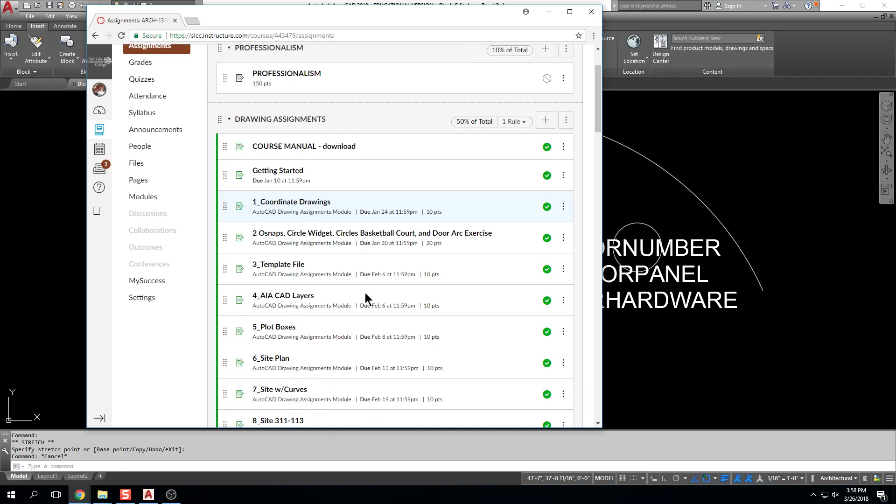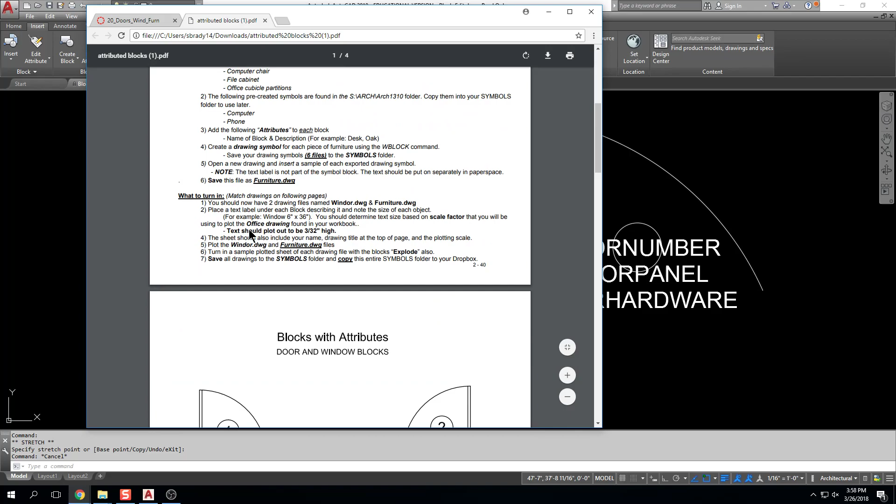So let's look at this real quick. Let's go to assignments. Okay, so you have a bunch of attributes you have to define for these objects. You have a left-hand door, a right-hand door, a double door. If I were doing this assignment, I would draw this one door.

Luckily, I have it already generated. I can copy these around and these attributes will work. But essentially what I would do for this assignment is draw this door, add the attributes, block it, and then those attributes would activate.

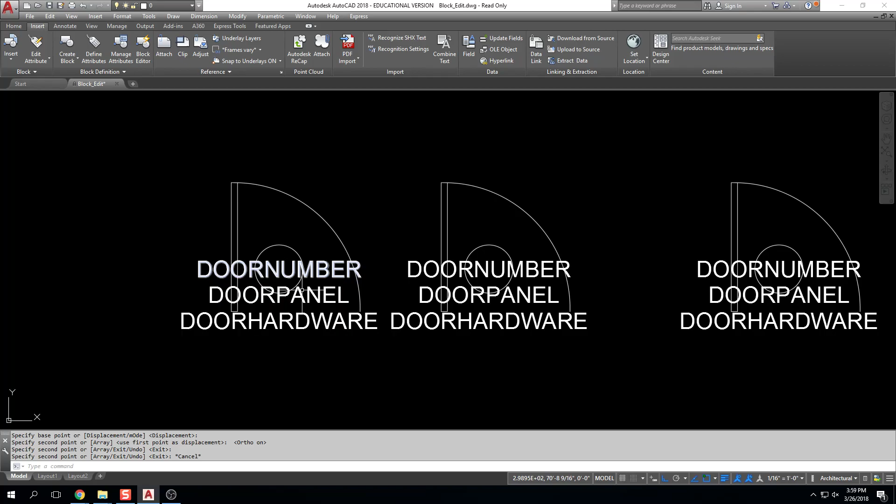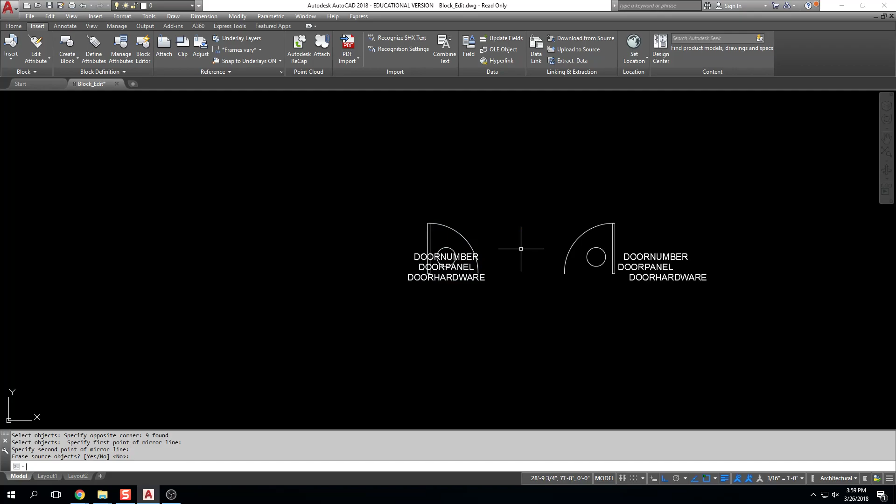Then to do this next door, having that first door already created, I would copy it over, or mirror it, and then copy these attributes over from center to center, and reblock this one, and I'd have my second door. I wouldn't have to redefine everything.

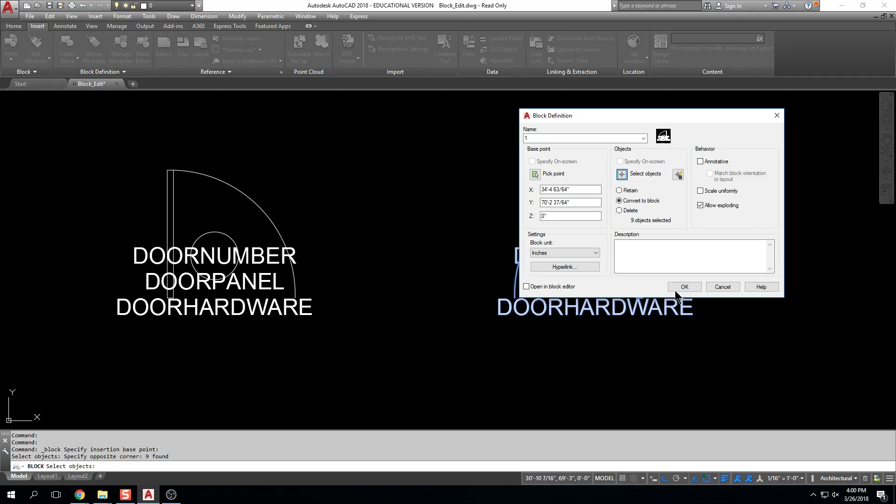Now when I go to block... I'm cheating, I'm being lazy. Right? Those work just fine.

So when creating the block, it doesn't really matter the type of block we use. Do we have to create just a regular block or a W block? You're going to want to create W blocks. I'm just being lazy because I don't want to save them out on my computer, but in general, forever, you'll just be doing W blocks, because you'll use your blocks over and over and over again.

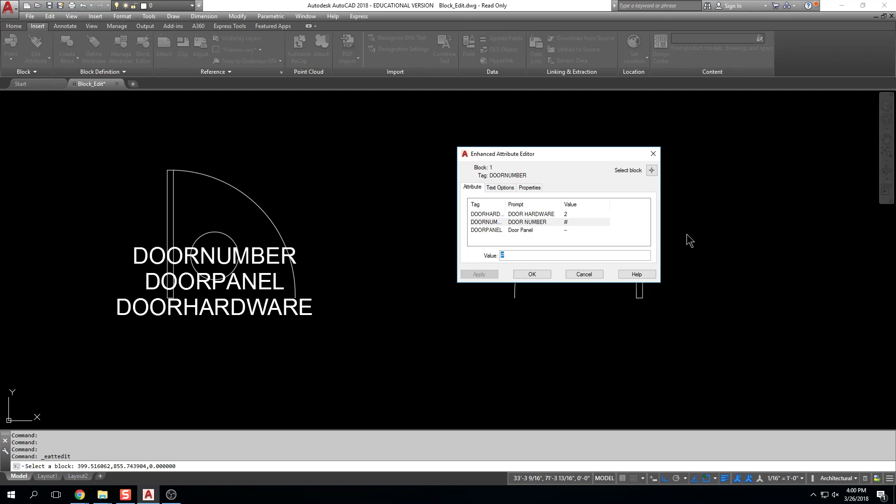Right, so I have this door, and now I need to create this other door. I'm just going to copy this one down, explode it, select it, mirror it, and I could mirror over all of this information to have my door there. So what's nice about this is I can create one, copy it over, explode it, mirror it, copy the attributes, finish that one, copy it down, explode it, mirror it, and do the attributes again.

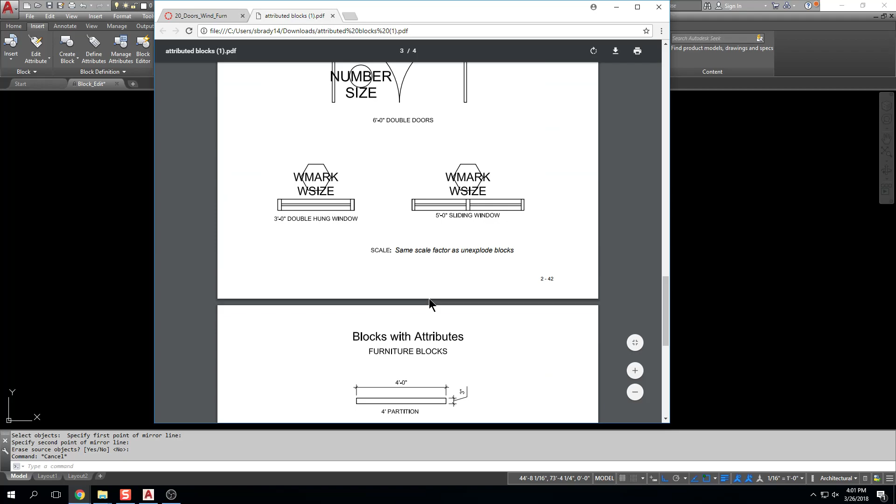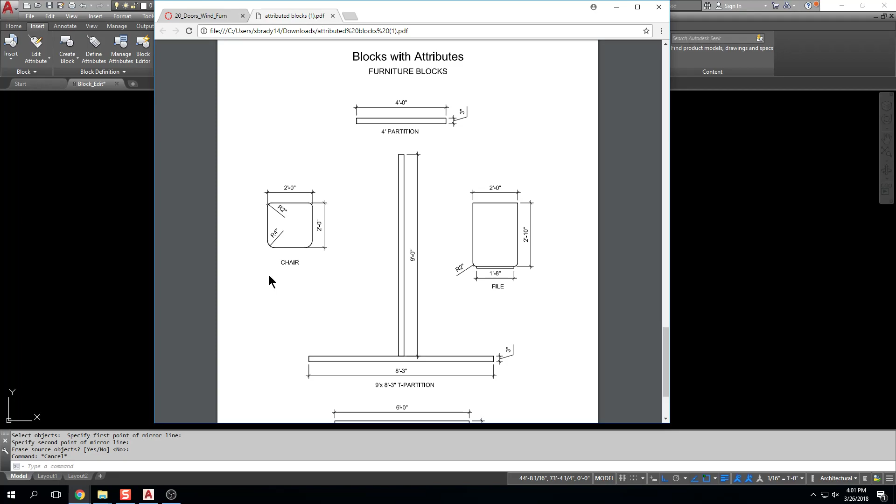But your assignment is going to be to create these blocks with these attributes, these windows with these attributes. It's extensive. And then there's some furniture that's going to have attributes associated with it. Everything in a set of construction drawings gets scheduled. Windows have a schedule, doors have a schedule, furniture has a schedule, and it's nice to build that information into the specific object so you can extract it out and the schedule generates automatically, as opposed to going through with a highlighter, finding every instance, highlighting it, and typing it all in.

I put this up on Canvas, so I have assigned it, but what I'd like to do is go over this information again next time. We'll go over attributes one more time, and we'll talk about title blocks with attributes next time as well.